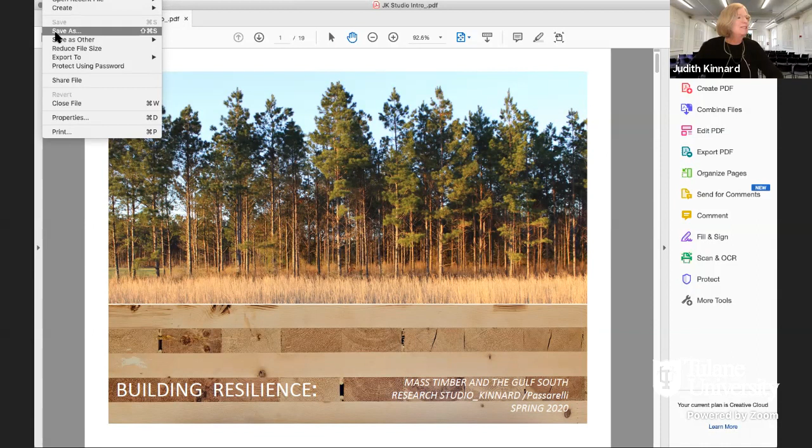So I thought I would— let's see. Hey, every time— oh yeah, sorry, I had joined the afternoon meeting by mistake, they're actually different numbers or whatever, sorry. That's Deborah, welcome. Hi. That is, of course, my fault. No, it's all right. I thought that we had to do separate numbers, but in any event. It doesn't matter, I figured it out. Well, sadly, I think I've created confusion for the students, for the faculty, for the entire world, but that's the world we live in.

So Deborah is a professor at Pratt Institute and a principal at Gans & Company Architects in Brooklyn. Deborah has a long relationship to these themes, not so much mass timber, but certainly housing and disaster relief housing and modular housing. She is also someone who has been a good friend of the School of Architecture and of the City of New Orleans, having done a lot of work in the post-Katrina environment in that setting, and has joined us in reviews a number of times.

So Deborah, we're delighted to have you. I'm delighted to be here. I'm looking forward to learning a lot.

Okay, every time I try to do full screen, something's wrong. Can people see my screen adequately? You went black. You might have to share again. Try to share the screen and not the app. There we are. You're back, but apparently I can't go full screen. Should I bother to reshare, team? Yes. I always do it wrong. Zoom is very finicky. All right, stop share.

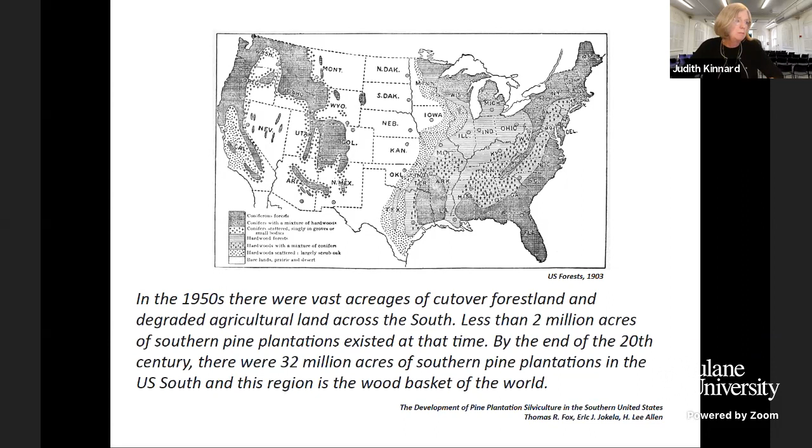So I wanted to give you the arc of the semester. The students initiated some research on forestry, southern pine timber, and some economic themes, as well as some prototypes associated with timber and mass timber, so that we could understand more about it.

We also looked at some economic issues, and I think this is particularly relevant now because in the post-COVID world, one of the things we've discovered is that the economics of forestry in this region, but probably broadly, is highly dependent on economic forces.

During the recession of 2008 to whenever, stumpage prices at sawmills went down, of course, because less building was occurring. Given the long cycle of growth for these forests, the lack of stability in this industry is a serious concern.

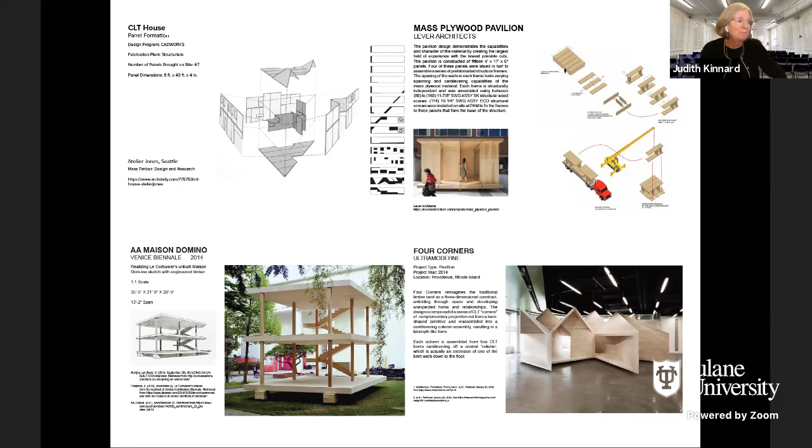But how could we resist it? So the first exercise that we did was, I think for all of us, a kind of learning experience about how this material works relative to the materials and structural systems that we understand, both in terms of concrete and wood and steel.

We took some interesting contemporary and maybe a few not-so-contemporary houses and went through a process where people first documented and tried to understand the structure as it exists, then translated it as directly as possible into mass timber. In a final phase, we gave them license to transform it relative to criteria they identified, either optimization criteria or criteria that were more fluid than that.

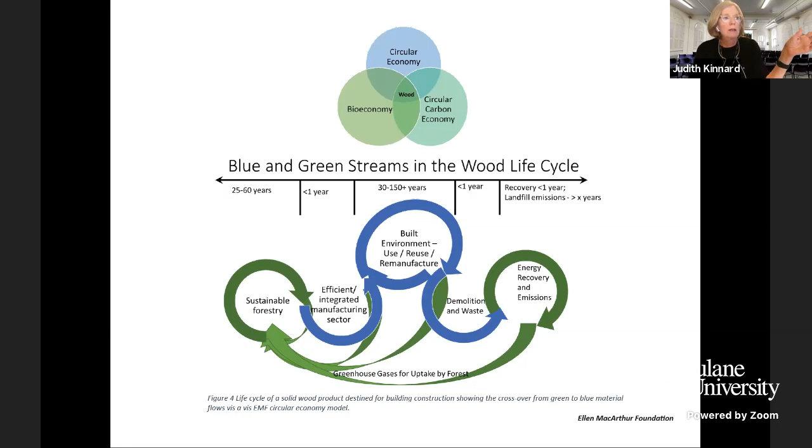We're aware that historically that's been a tradition in New Orleans. New Orleans is a wood city, and our interests extend beyond New Orleans, but of course we're in New Orleans, so we had that often in the back of our minds. Much of that wood was taken from those historic pine plantations, the longleaf pine stands that had been in the region.

A number of our houses were built from wood from flatboats coming down the Ohio River carrying goods. These were built by farmers out of 2x12 oak taken from the Ohio Valley, then dismantled and sold for lumber. Many of the shotgun houses in New Orleans are constructed from this material that started off in a different way, an early example, sadly uninsulated and not very sustainable, of solid wood construction in these barge-board houses made of 2x12s arranged vertically.

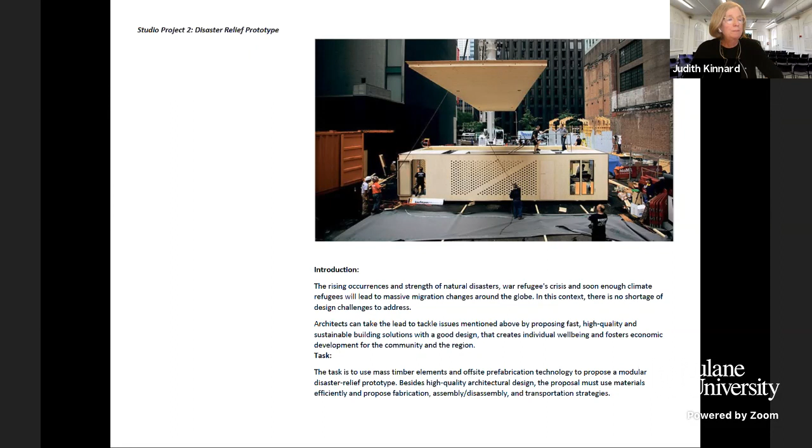The idea here was that we explored how timber could be used in modular construction. We looked at volumetric units, we looked at flat-pack systems, and then gave students some precedents which they analyzed, then asked them to make a proposal relative to a scenario that they could design, one that would be deployable rather quickly and then eventually find a second use.

We asked students to be as quantifiable as possible in this equation. We did go through some cost estimating spreadsheets, but I suspect you won't see much of that. You will see some carbon calculations, but...

This idea of building disaster relief structures out of wood probably does not make economic sense unless there's government support. Although the price of CLT is coming down with the addition of these new factories, and it's certainly a material well suited towards factory production in a serial kind of way.

So most of the students have volumetric modules, though there are some that operate somewhat differently, and you'll see that. We did go through these calculations, and depending on the scale of the unit, they might have 208 cubic meters of wood and certain carbon sequestration associated with that. A smaller unit will of course have less.

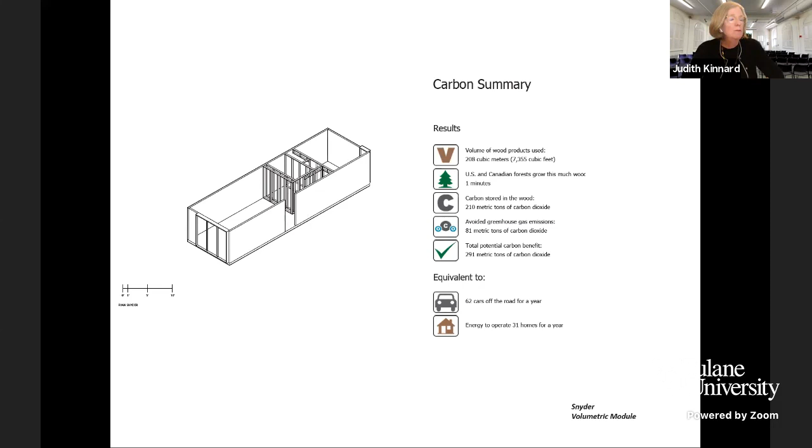In the end, when you think about CLT, it upends the equation that Fuller proposed in the 20th century, which was that lightness was better, that materials like aluminum and steel were going to create a lighter house and therefore have maximum advantage relative to themes of energy. This proposal inverts that equation, proposing structures that emphasize mass, sequestration of carbon, and the many aspects of timber, both psychological and technical, as an advantage worth considering.

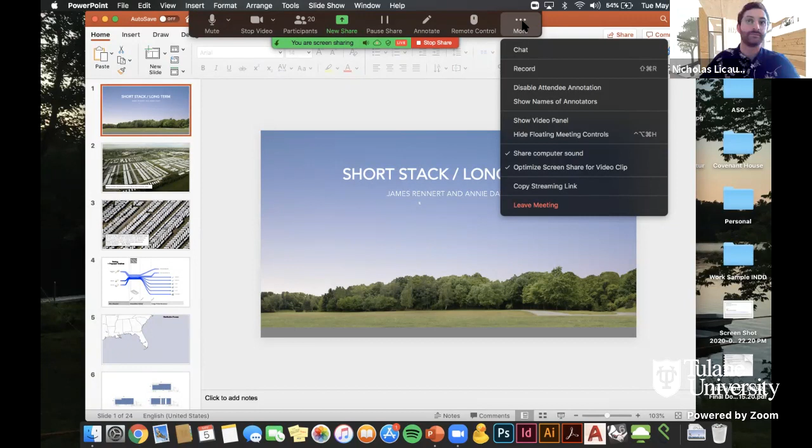Hi, sorry, I'm sharing my screen so I can't see anything but my screen right now. I think it'd be better if you click view options at the top and check show video, under more. Yeah, show video panel. Oh I see, thank you. No problem. All right, how's this working? We're good. You have to hide it because it's going to cover up your presentation, like we're going to see us over the video. But do you want that? We can change the grid. Oh I see, no we can't. No Annie, the video you're seeing is stuck on the screen. Yeah, got it. Click the tiny box so you can make it just one. Yeah, there we go, this is fine. Okay great. It wouldn't be a Zoom presentation if it didn't take 5 minutes to troubleshoot.

All right, I think that was a good conversation on the use of time to get us started. Annie, if you want to go to the next slide. Yes.

Judith just showed this image at the end of her presentation, but the thing that stood out to us most in proposing a better alternative for CLT as a long-term disaster relief solution is that you really have to think about the long term. These trailers were meant to be deployed for 18 to 36 months, and in the case of Katrina, they were here for over 45 months, just sitting here, slowly being sold off or disposed of as waste.

FEMA's explanation for this is basically that the units just aren't worth keeping because they're so cheaply made that they're only meant to be used for a few months. If people want to buy them for pennies on the dollar, they do that, or they just dispose of them.

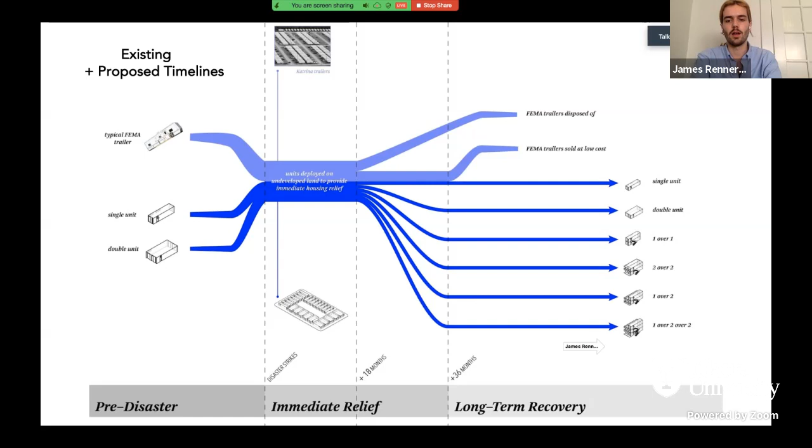So our project really takes two phases: the first being a way of providing immediate relief to as many people as possible, and the second being a way to create a long-term sustainable housing supply in the city.

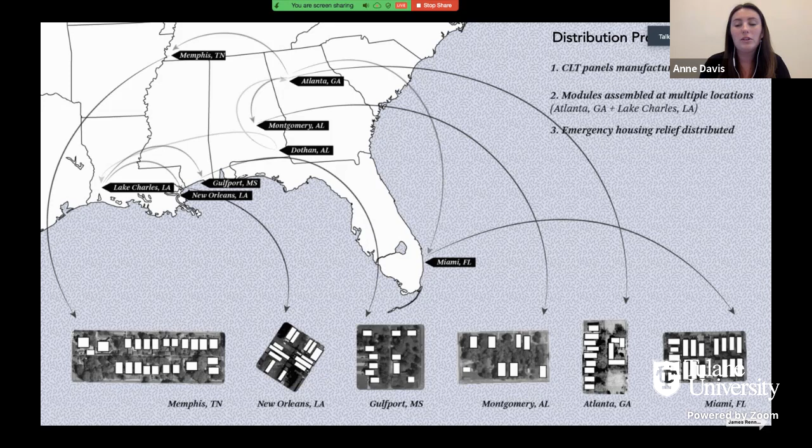There's a single unit and a double unit, which we'll get into more later, but they're both deployed by truck. These units were designed so they could fit on a truck bed and take up basically the whole space of it. The single unit takes up one truck, and the double unit is basically two single units put together, so that's two trucks per double unit.

It's also worth noting, since we're the first presenters, there's not much to compare it to, but I believe the units we developed are the largest, if not one of the largest, in the class. I think because we intended these for long-term habitation, we had a higher standard for amount of space.

The idea here is for phase 1 initial deployment, where you're deploying a lot of individual units on a low scale, as quickly as possible. We explored a few different options: one emulates a fairly typical city block; the second divides this into multiple blocks, which most closely resembles the FEMA strategy; and the third keeps dividing these blocks down as small as possible to create a really tightly knit urban grid in this first phase of deployment.

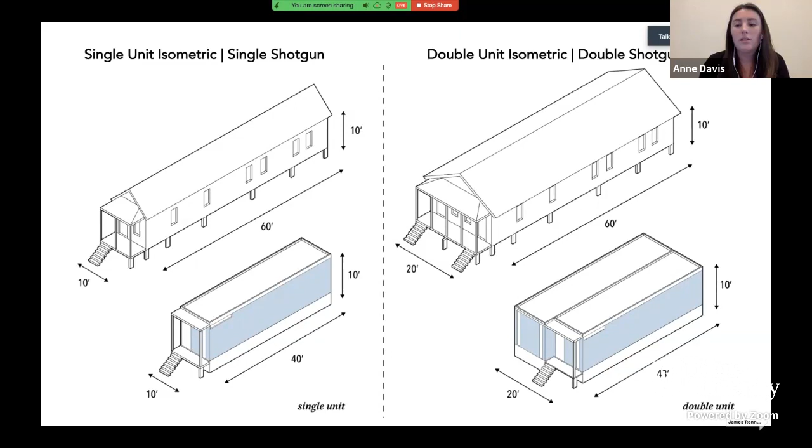These are our basic materials, not every single one, but when doing this material study earlier on, we thought it was interesting to compare how the square footage changed from single to double. From this we did a cost analysis as well.

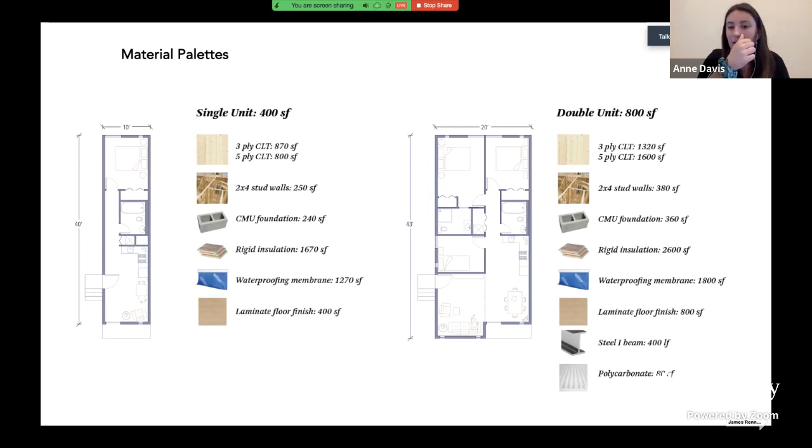Another thing we learned, which you'll see in coming projects, is that the pieces of CLT cut out of the panels don't have a great use. It's a wasteful deployment of CLT if you have a lot of punch windows in a blank, because you end up with unusable wood that's already been harvested. So we dealt with this by using the natural structural integrity of the CLT to our advantage, cutting most of our windows as floor-to-ceiling slits to eliminate this problem.

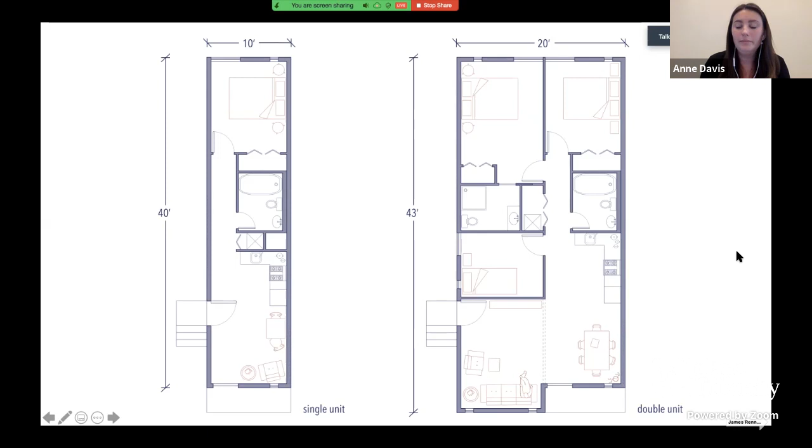This is a detail of the plan. This wall here is a polycarbonate wall, slightly translucent, in order to easily take it down. It doesn't go all the way up to the ceiling, so this bedroom can easily be changed into whatever suits the owner's needs.

We have a few sectional perspectives meant to show the relationship between the construction of the building, which you can see in the section cut, and the interior space as well.

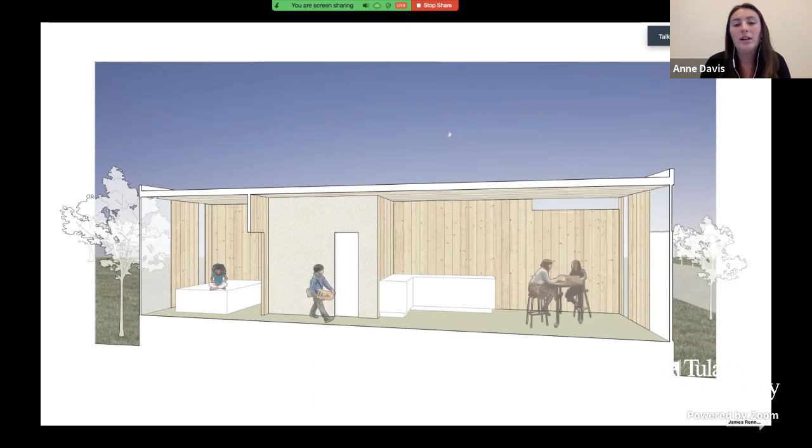And we have a few more section perspectives, these a little more rendered. You can see the CLT texture, which is one of the biggest advantages of this material - the interior doesn't need a finish to have a really beautiful space.

And then I think we're going to wrap up by talking a little bit more about what these look like when they're aggregated. So the idea really being that you can combine these in multiple ways. For the sake of clarity, I think we mostly showed it as if you put a single unit on top of two double units, which I think is a fairly typical scale that could be integrated into a lot of the cities we talked about.

But Annie, if you can toggle forward. Mm-hmm.

The materiality of these was something that we dealt with for a while, and what we ended up proposing is to keep them almost pretty raw in the initial deployment. So this top left study, that's Henry Blueskin, or really any long-term water barrier, and that would be for the initial deployment — they would be almost like these naked units. And then when they're aggregated, you really have an opportunity to put any finished material on.

So we looked a lot at Hardie board. I think it's contextual here, but you could do shingles or aluminum panels or whatever is most fitting to the context. Yeah, we wanted the aggregation cladding to be as easily applied as possible without having to take off cladding from the first phase.

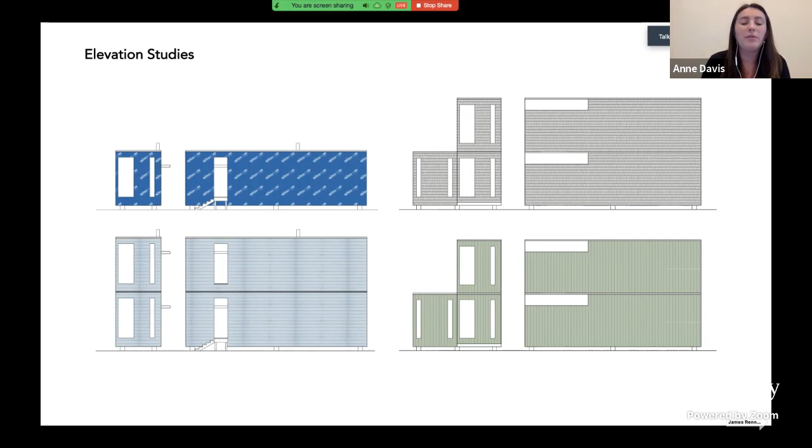So as James said, that turned out as basically having the cladding for the first phase be underneath the cladding for the second phase.

Great. A rather grand New Orleans environment. Yes, maybe not typical, but... the whole city's exactly like that.

Okay. So should I leave it on this slide, or would you like me to go somewhere specific? Well, let's leave it on that image unless one of our guests asks you to retrieve something different. Yeah.

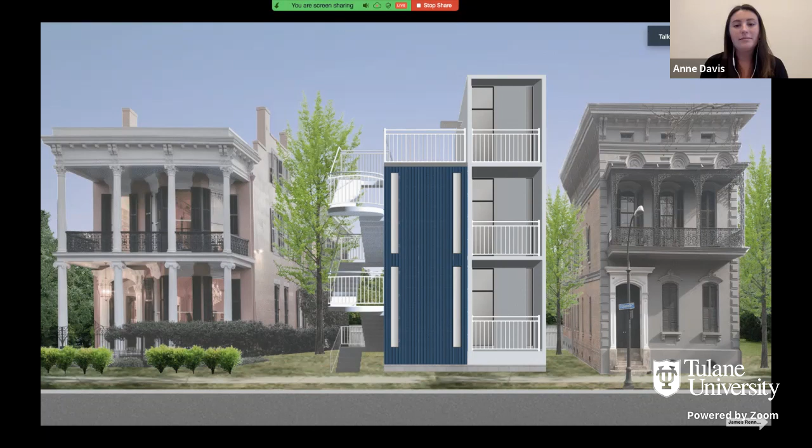Can I just have a couple of questions. This is Tim.

So given the lateral and vertical loads of CLT, what's the minimum foundation support layout? Could you have a series of sonotube poured columns coming out of the ground spaced at some distance? I'm interested in what the minimum foundation solution would be, because you tend to quickly wrap it in poche. One proposal was a series of CMU walls parallel to the length of the modules. The other is this idea of point foundations. I'm just curious what the structure allows — how you could solve that. I'm trying to imagine what the minimal foundation solution would be.

So for the first phase, we're imagining a CMU wall. And then for this aggregated phase, we imagine screw piles. So in New Orleans, obviously you're going to need a lot more foundation support than in other cities, but yes, for the aggregation, it would be a much more permanent screw pile condition. And then I think the foundation is just wrapped to enclose the actual structural solution. Yes.

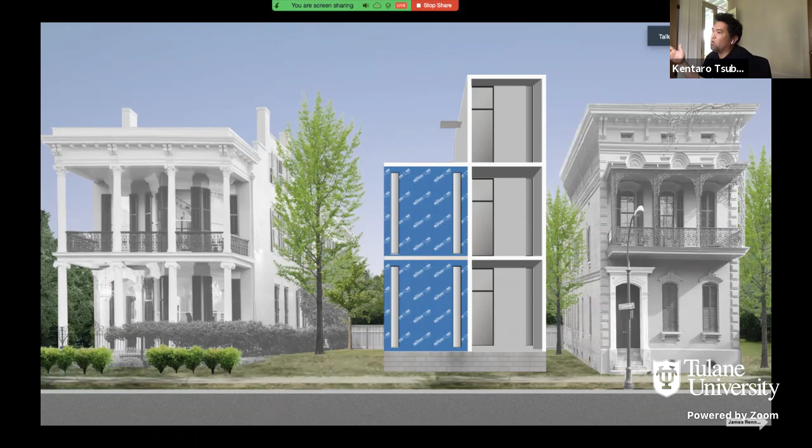A little technical follow-up: you would actually get two walls at the center, right? Not two modules. And that would also help, and maybe you could then do it with a T or a flange on top of the wall to mend the roofs together.

Do you just put the roofing membrane right on top of the CLT, or is there another substrate? Is there insulation at some point? There's rigid insulation on the outside of the CLT, and then the weather barrier.

But to pick up on Deborah's question - wouldn't you have to ship them in as two boxes, fully structurally self-sufficient elements, so that you would get a doubling of the wall in the middle? Which would help.

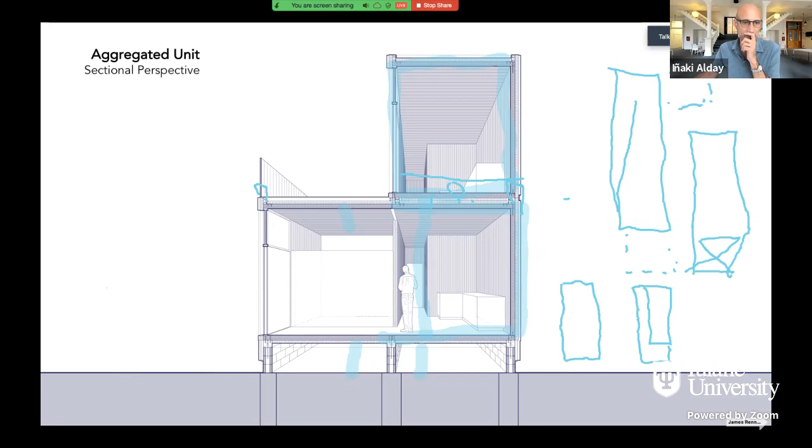But really interesting and thorough. And let me clean all this mess.

You'll see some variations that get at some of that. The idea that they become—first, thanks for pulling us back, because the whole premise that these become permanent housing, that there's no such thing in a certain sense as temporary, I think is a beautiful idea, and we should say that to begin with since we all just jumped right in. But I love this notion of the gap, the spatial gap, the courtyard, the flexible thing in between, because with CLT it's a very solid, gapless, airless kind of construction. Especially in terms of infrastructure, we don't really understand the infrastructural systems and whether they differ between temporary and permanent. The idea of the gap at the scale of the courtyard is wonderful in that regard, but also the gap at the level of the chase.

I thought you were going somewhere when you mentioned stud wall construction within the CLT, because it's really hard to run services in CLT—you have to route out the wall. Where do you put your electrical conduit? How do you get your plumbing through? So the idea of creating a gap by having an enclosure within an enclosure, where the bathroom is somehow separate from the structural shell—it's not as spatially poetic as a gap that becomes a courtyard or somewhere to live, but it's an equally important notion of gap and air within these houses. I think you could push that further—how does that bathroom or kitchen or air shaft chimney effect nest within this thing that is so tight and solid and resists penetration the way CLT does? It could be really wonderful.

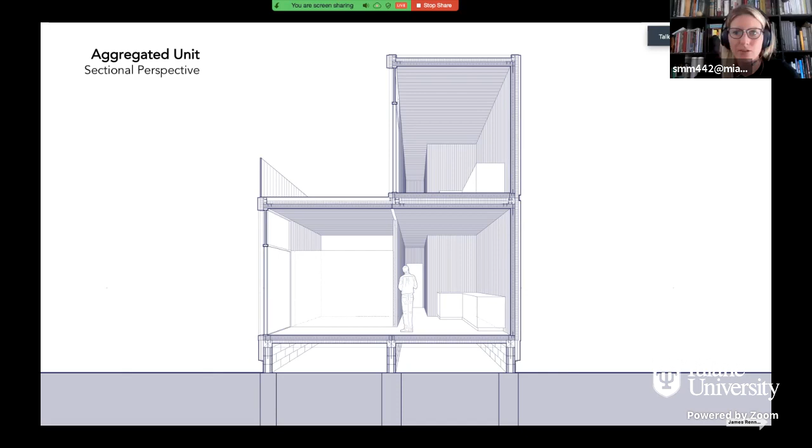Great. I just wanted to say, I think one thing you did take advantage of—I don't know exactly what your ceiling heights are here, but they look to be more, like maybe 10 feet high or taller. And that's one advantage when you're designing and using these panels, is that we can use those taller ceilings. I noticed you guys place windows up at the ceiling. Perhaps they're operable—let's assume that they are. So it seems like you're trying to understand how to passively inhabit these spaces and really deploy some of the material and economic efficiencies within the panel, because it's no more expensive to make an 8-foot box than a 10-foot box.

And that also, I like seeing it in this context, which we all laughed about, but it allows this to be more contextual to those high ceilings that exist for a reason in your climate, in your context. So I do applaud you for that, thinking through it that way.

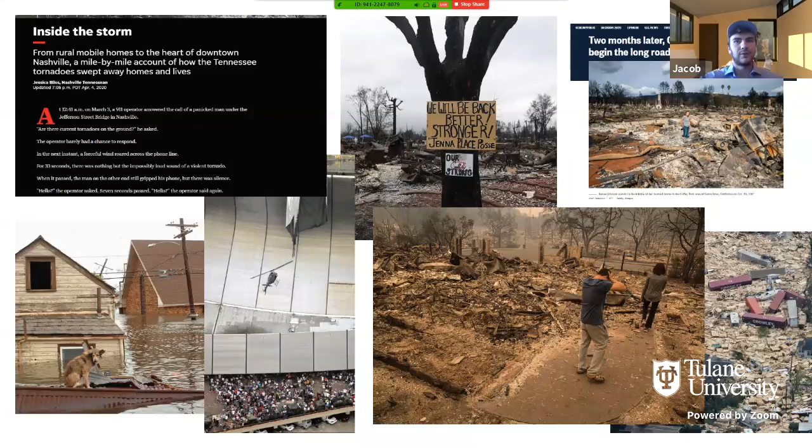To start my research, I looked at the National Disaster Housing Strategy by FEMA. They developed this plan after Hurricane Katrina, because they realized their current plan was inadequate at a federal scale.

The national goals they outline are: support individuals, households, and communities in returning to self-sufficiency as quickly as possible; affirm and fulfill fundamental disaster housing responsibilities and roles; increase collective understanding and ability to meet the needs of disaster victims and affected communities; build capabilities to provide a broad range of flexible housing options including sheltering, interim housing, and permanent housing; build and integrate disaster housing and assistance with related community support services and long-term recovery efforts; and improve disaster housing planning to better recover from disasters, including catastrophic events.

The scenario I was looking at for this CLT proposal was interim housing after a catastrophic event. FEMA defines interim housing as the period from the day after the disaster to approximately 18 months after. One thing they really emphasized was the need for a rapid response to a disaster.

That's why I was looking at doing these prefabricated panels that could be shipped, because I was worried that, as discussed with oversized loads, after a disaster you don't want to wait for a bunch of oversized modular units to arrive. That takes a lot longer, whereas you could rapidly ship a shipping container that fits into more modes of the transportation network.

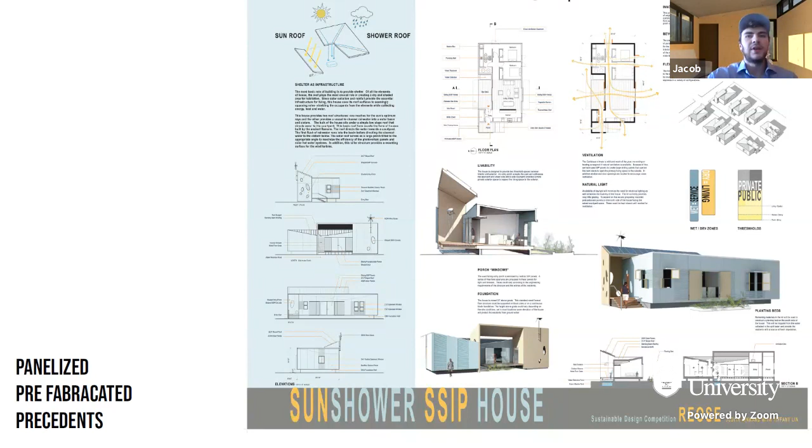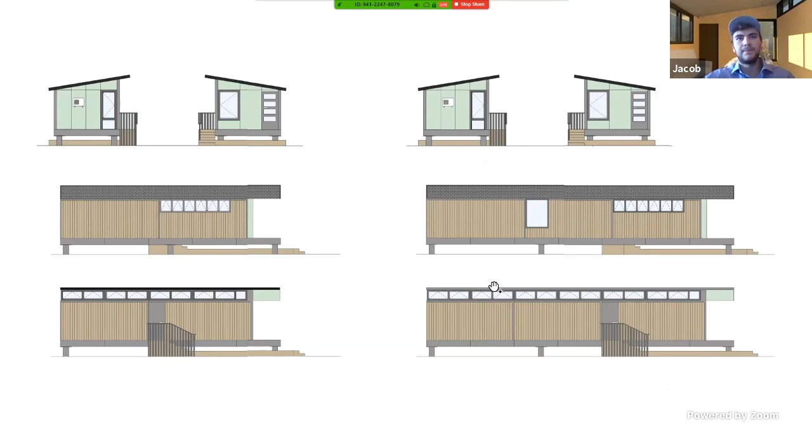Now let me bring these videos over. This is an animated assembly I made of the house, and you can see what I was talking about with those different panels. This regular construction and repeated panel sizes speeds up fabrication time so it can be a rapid, large-scale deployment.

I'll play that again - and that was for the two-bedroom. This is for the one-bedroom.

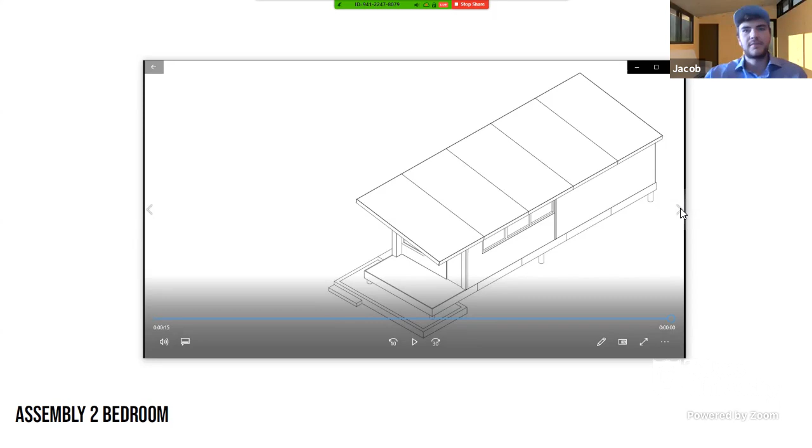Is the roof CLT too? Yeah, so the roof would be CLT panels. I was thinking of doing solar shingles through a partnership with Tesla to offset the energy costs and make them not so demanding on infrastructure - I have a slide talking more about that later. It would be CLT panels with solar shingles on top, and there would also be a membrane.

So this is these going into the shipping containers - this is for the one-bedroom, I believe. Let me start it again. This would fit into a 40-foot high cube container, where the interior dimensions are 39 feet 5 inches by a height of 8 feet 10 inches, and a width of 7 feet 8 inches.

You can see the different components - the idea is that these would all be bolted together. I propose using an XRAD system, but that's one area I'd like to look more into, the engineering aspects of fitting these together and how you could really engineer this design into a working proposal.

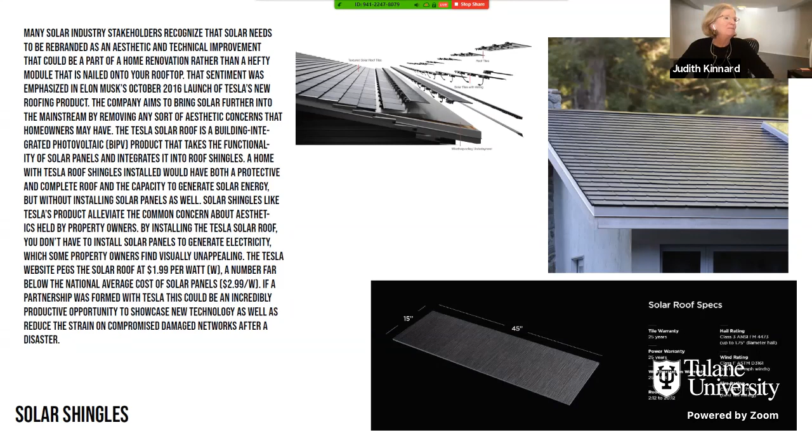This is the solar shingles here that I was talking about with Tesla. And I get that these are all very expensive products.

So the idea I was thinking to offset these expenses is that, according to the FEMA disaster strategy, they really suggest using public-private partnerships and creating a plan ahead of time. So I was proposing that possibly you could work with these companies ahead of time to do some kind of charity or tax incentive to get these products and technology into the public realm more, letting consumers see how easy it is to have these solar shingles that would offset your energy costs, as well as Tesla testing them out. I think helping disaster victims is a worthy cause for donating some technology.

So these would be applied, there'd be a membrane on top of the CLT with the solar shingles attached, and they would be shipped in the shipping containers as well with the houses. That's kind of where this idea of storage, deployment, and then shelter comes in as an idea of reuse. In theory, these panels would be able to be unbolted and put back into the shipping container and reused again.

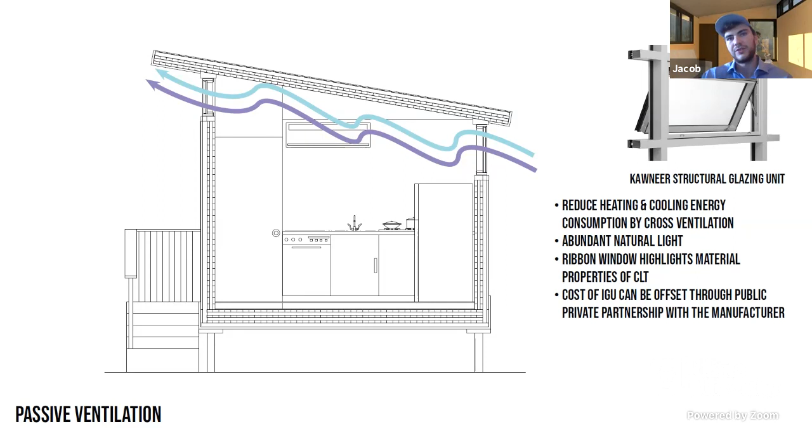Great, thanks Jacob. Yep, that's it at the end.

Derek speaking here. I'm just wondering about the approach, obviously, a panelized system has significant benefits, but I'm wondering about the necessity to deploy labor to assemble it as distinct from something which comes essentially prefabricated. If we look at the previous one, which is essentially modular, you put in your mini piles, develop something to deal with the foundations and structure, and pop it on top, and essentially you're 90% of the way there.

With no necessity for local trades, local organization, logistics, etc. So clearly, when you bring the panelized version, that takes some time to deploy, and you need skilled labor in order to do that. So I'm just wondering, was there a conversation around that balance between the two? This is not an architectural question, but simply a logistical one.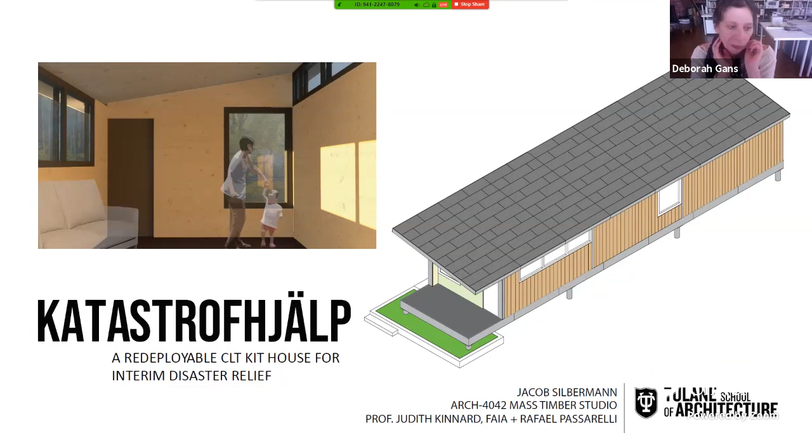Hey Jacob, this is Deborah. Just wanted to say, I appreciate the questions that you asked at the beginning of your presentation.

And I think the whole premise of the studio is set up to challenge how we accept, you know, what does it mean for disaster relief or just housing communities, right? And the first project did the same. And I think one of the advantages that both of you have touched on in using CLT is using a wood, a natural material, a sustainable material, to create a healthy living environment right away versus accepting these trailers that, let alone the waste, but I would argue they're not healthy living environments.

But I guess I would ask you to continue to challenge the notion of what does it mean, especially since yours is meant to be temporary, and you talked about that temporary, and you do accept that sometimes they define temporary from 45 days, but it goes up to 45 months or years, whatever. So how do you create that healthy living environment, but accepting that it's a temporary living? And maybe we can begin to peel away some of the things that you're providing in your proposal here, like is there a reduction of just materials and maybe even programmatic elements that we can live without under this temporary notion? And I'm not asking to sacrifice quality of life, right.

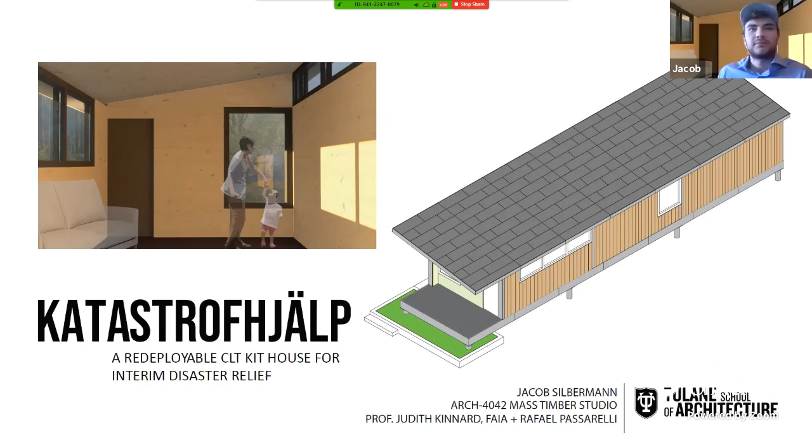So I wonder if in your proposal, maybe if we can just see the slide in the back - this animation again? Can you see, like, which one? No, just the slide in the back without the animation. Oh sorry. So I wonder if - I'm going to try to see if I can do a better job with the iPad in drawing.

Yes, so I wonder if you can have like one kind of window, no, and one kind of whatever, beyond the structural problems that we might have seen here. But in a way, there are a lot of different elements that you have to be looking for them inside the container to put it, no? So I just wonder if one way of continuing the thinking in this, not only in this project but in this philosophy of design, is how much can you reduce the number of elements that can be used in very different situations, the same element, to solve the different needs that you have.

And the simplicity of the CLT panels too - if those windows are all vertical windows that are full height, then the panels are simpler, and there's a whole economy of means overlaid onto this project that I agree with Inaki about. I think that would also help sort out questions about the order of assembly, and using the ability of CLT panels to act as the columns and supports themselves would be maybe a different way to even tackle the whole issue of fenestration.

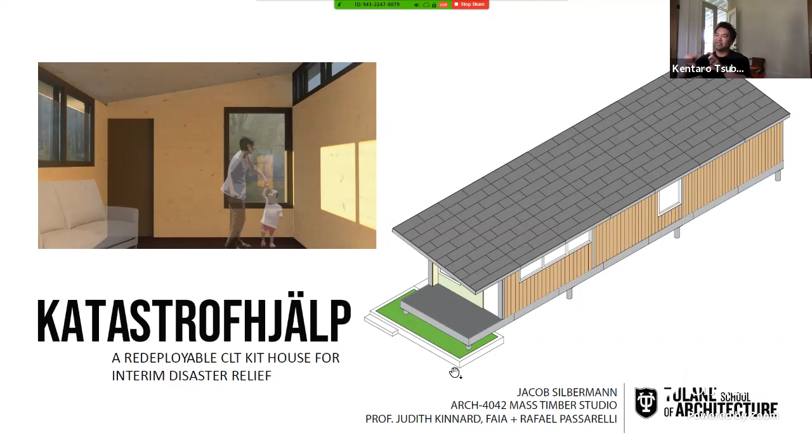Well, so the CLT - you're going to be spanning the CLT panel as a floor, but what really has structural capacity here is the exterior CLT panel vertically, because the deeper the section, the more capacity to span. So I've been wondering - the strategy should not be the floor supporting the wall. It's the other way around, where the wall spans between and the floors hang from those things, as opposed to the other way around. Because if the floor is actually supporting the wall, look at the wall, the section of the floor itself.

Well, that's a really good point, Kentaro. We did discover that this platform frame is the preferred method. And why is that? I think it's either ease of assembly, or the other approach would put a lot of strain on the bolting mechanism, the steel or whatever material the bolts are, and this is more of a gravity system.

I think it's because of the two-way nature of the CLT, the two-way load. But I could be misconstrued. You can do it the way you described, but I think you'd spend more on the connectors.

Yeah, just to jump in, the conventional way, especially in a factory, is that you lay the deck, the first layer of CLT, and use it to have your walls plumbed and aligned. So you don't have shear force in the screws like you would in balloon framing. It's more conventional for CLT to use platform construction. But in a small building like that, you could do it differently if it's more economic or efficient, though it would have to go through a different level of development.

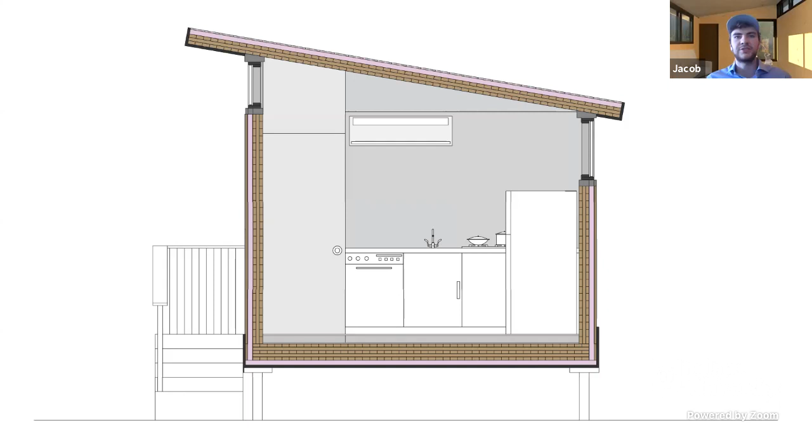So you're saying something more unusual, not so regular? No, I'm saying the opposite of Terragni and Eisenman. I'm saying more like Kahn. I couldn't be further from Peter Eisenman right now in my comment, but I appreciate that you brought him up.

Hey, can I say one final thing? I get that you're letting the 8 foot panel run horizontal and maximizing that dimension for the size of your box. I think, like Tim was saying, you're letting the packing of the box put you in a box. But even if you had another 8 foot panel cut into 2 foot or 4 foot pieces, and stacked the CLT so your ribbon window didn't have to be continuous. It's about allowing yourself to think about how you're cutting up that panel. So it's about questioning the process of packing everything in the box, but then saying, I really want this passive strategy, and going back through the iterative design cycle and feedback loop to eliminate this 8 foot constraint on the wall. How can I do that?

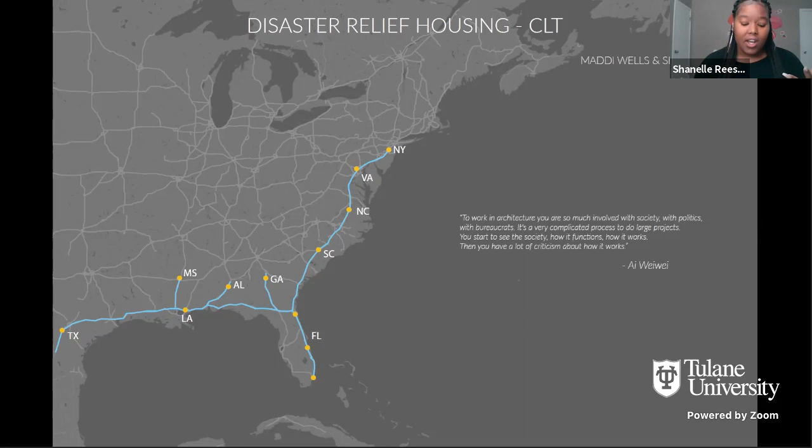So when taking on this project, me and Maddi were very concerned with the design needs for the people who were unfortunately left behind during certain disasters. Through our research, we found that people normally left behind during these disasters are people with housing or financial insecurities, people with disabilities, and some people who are just overly confident that they can survive a storm.

You can go to the next slide. So living in the South and along the coast, we are most prone to hurricanes and its disastrous storm surges. Living in either of these 10 states - New York, Virginia, North and South Carolina, Florida, Georgia, Alabama, Mississippi, Louisiana, and Texas - these are some of the top 10 states normally hit by serious and disastrous hurricanes. So some of the similarities we found between these cities was a coastal rail line that ran through all of them, called the CSX freight train.

It's extremely important that during disasters these resources get to places in need quickly, and we found that a very efficient way to do this is through train. Our module is going to start in Dothan, Alabama, and travel a journey through Tallahassee, Pensacola, and New Orleans. A typical freight train travels 14 miles per hour. Going from Dothan, it has to get to the coast, starting in Tallahassee, riding through all the coastal states, and it'll take roughly 11 hours, 12 minutes, and 51 seconds for our units to arrive on site.

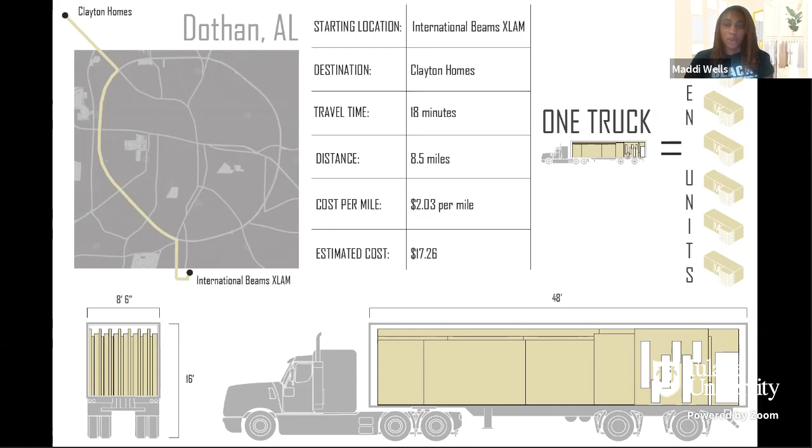Getting further into that breakdown, analyzing how you get from International Beams, where the CLT is fabricated and created, to a place such as Clayton Homes, where they make prefabricated mobile and modular homes - we analyzed how we'd get this from the fabrication factory to the prefabricator. Looking at how one truck can carry up to 7 units if it were just the panels, how much that would cost per mile, and how far that is within the city of Dothan. Then looking at how the transportation would work once fabricated into a module, and how much that would cost, exploring different opportunities for transportation.

But even after that, getting it to the train station, going through Dothan, Tallahassee, Pensacola to New Orleans, you see that with one train able to carry 200 or more shipping containers, you're able to get more units in one train ride, which may take 12 hours versus 5 hours of driving. But you get more through a train than through a truck - versus one unit, you get 200.

All right, so now we're going to get into explaining what our module is and the breakdown of this unit we created.

The module itself stemmed from this idea of stereotomic, and then adding this extruding tectonic element, which we call the pop out, and then having this transitional wall as far as the design.

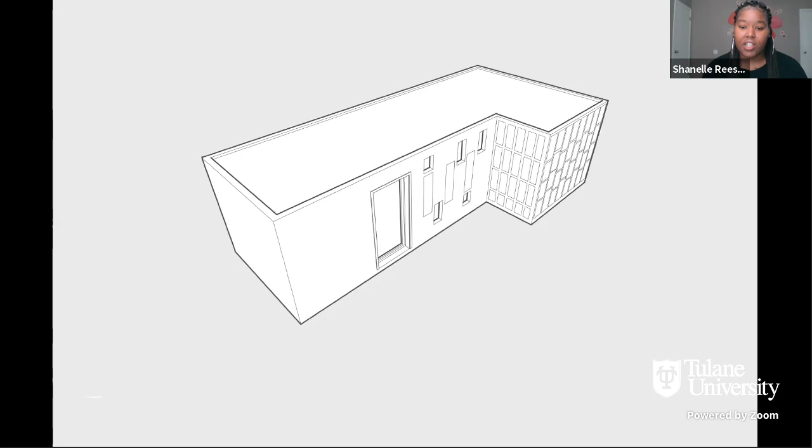Next we have a GIF showing the breakdown of the bathroom, the living space where the kitchen is, the bedroom, and then showing how that pop out is attached to the bedroom area.

Once we get into the floor plans, Maddie will explain how those walls can either be interchanged, or where the pop out can be placed.

To provide some more variety, we decided that the pop out should be able to be located either as an extension of the bedroom or an extension of the living room.

This led us to develop a variety of modules, such as the L, where you have the pop out as part of the bedroom, and the T, where the pop out is part of the living room.

The N, which is two L's mirrored from each other, is for intergenerational families - maybe your parents and also a college kid who want to have that shared space within the courtyard, but also need their own separate space and are able to take care of themselves.

We also developed the H, which is kind of two T's combined, which could also be for intergenerational families or a family with a small child.

The H also has a larger kitchen, as you can see here, to provide for a family with more than just one or two people.

As you can see, this is getting into sectional and elevational exploration of the space, so you have these subdivided areas of bathroom, kitchen, living, dining, and bedroom.

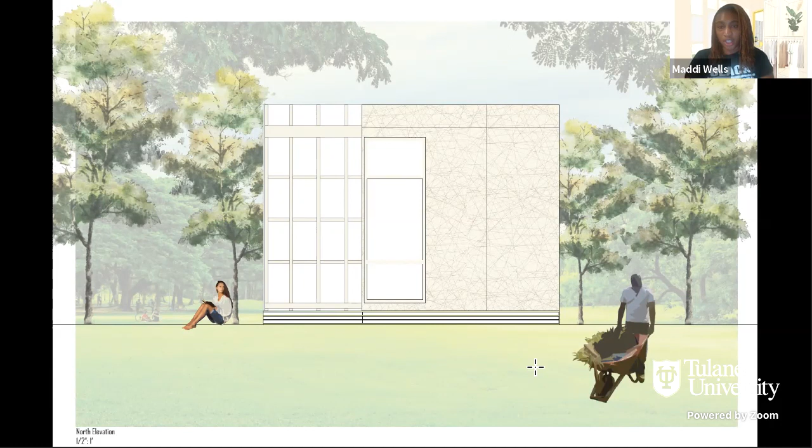You can see how the tectonic is fully expressed in its stud walls, using only a polycarbonate cladding to express and differentiate from the stereotomic and the tectonic.

All right, so deployment. Once our units get onto the CSX train line, then when it gets into New Orleans, it moves over to ownership by the New Orleans Public Belt. You can go to the next slide.

Once the New Orleans Public Belt has our units on their train line, the units are then stopped at our freight train terminal, which sits in front of our site.

We'll then have a crane come into the site to be able to unload each unit. It'll be assembled, and then the crane will place each unit in our particular arrangement on this site.

We picked the site a little bit closer to the river because in New Orleans, the ground right there is going to be a lot higher. So if we ran into any storm surges or anything like that, this area wouldn't flood as bad as if you put it on lower ground somewhere.

After these units are no longer needed for the disaster in New Orleans, they can be backloaded onto the freight train and sent to other cities in need. Or if New Orleans would like, it can also be stored in warehouses along the city for quicker access for future disasters.

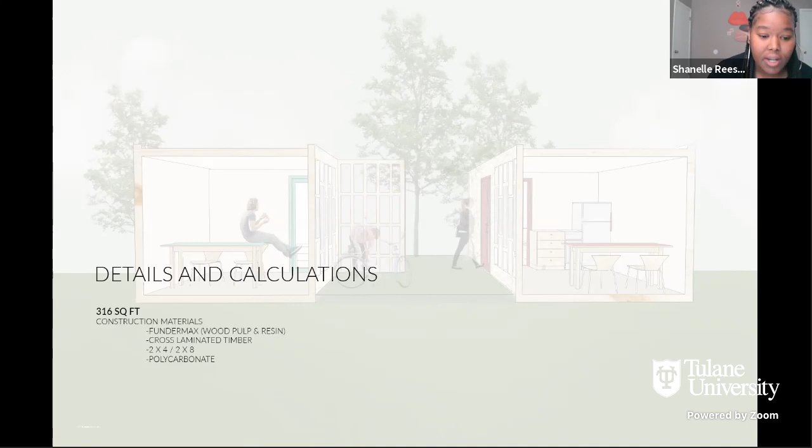The construction material consists of a Fundermax cladding system, which is made of wood pulp and resin, cross-laminated timber, 2x4s and 2x8s, and then polycarbonate for our windows.

This is just explaining the fabrication of the unit overall, showing the panels and the carbon calculations. As you can see, this particular unit is equivalent to 4 cars off the road for a year, and also energy to operate 2 homes for a year.

And as you can see, even here, the pop-out is still regarded as its own separate entity that gets added on later as a flat pack system.

This will go through the wall sections that we explored and the details that we researched. We have a parapet, and similar to what Kentaro was talking about earlier, the wall goes past the roof and supports the roof rather than the roof being packed on top of the wall. You can see the connection to the foundation.

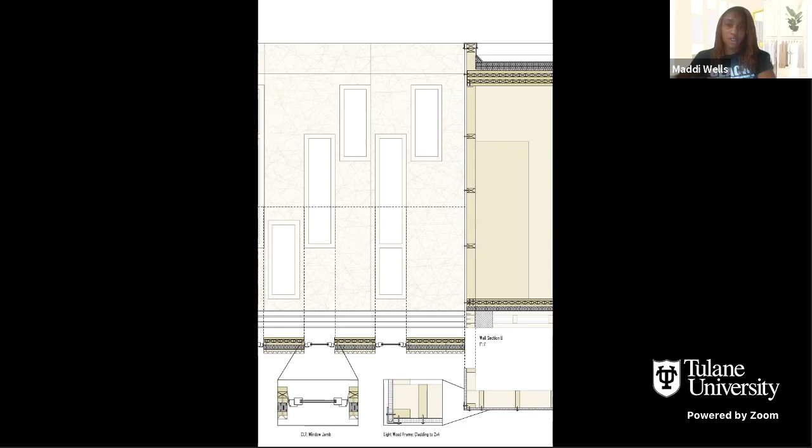This explores the transition wall where we have those windows and how that jamb works. Also looking at the pop-out wall fabrication and how the polycarbonate connects to the 2x4s. Then looking at the one window we have in the bedroom and how you connect the floor-to-ceiling window with a parapet was kind of difficult, but we managed to figure it out. Then we have some visualizations of what we imagine this environment would look like.

And that's our last image. Great, thanks.

So just a first question: the pop-out can either be deployed on the end of the module to make the L, or in the middle to make the T, but it's the same flat pack pieces. Is that the idea? Yes. Oh, that's cool, okay.

Can you go back to the slide where you show us your panels that you laid out? Thank you.

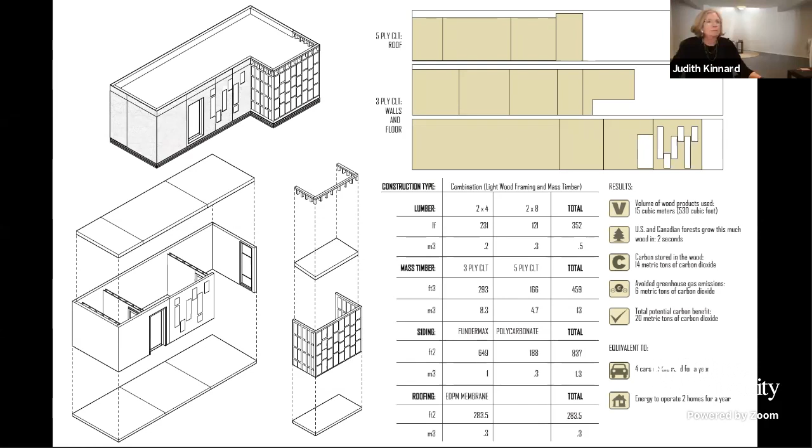I'm very interested that you guys chose the term stereotomic. I appreciate that you really approach this through an architectural lens and try to explore different architectural devices and deploy them with the same material method. But I find the idea of carving a space while working with a panelized system maybe too juxtaposed for me to understand. So maybe you can talk about how you landed on that term.

Yeah, so if I go back to that diagram, at first when we were discussing it, we weren't even thinking of the CLT and the 2x4s as two separate systems. But ultimately when we landed on having this pop-out that adds itself to the CLT, it occurred to us that you can do similar things with CLT by carving out windows, but as a panelized system it's really solid and durable and would preferably not have any cutouts in it, versus a stud wall where you can do what you want and make any sort of openings and windows. That's why we wanted to express that with the tectonic pop-out and show that yes, CLT still can do all the things you can do with a stud wall structurally, but for more flexibility, especially within openings and removal, it would be better to use 2x4s.

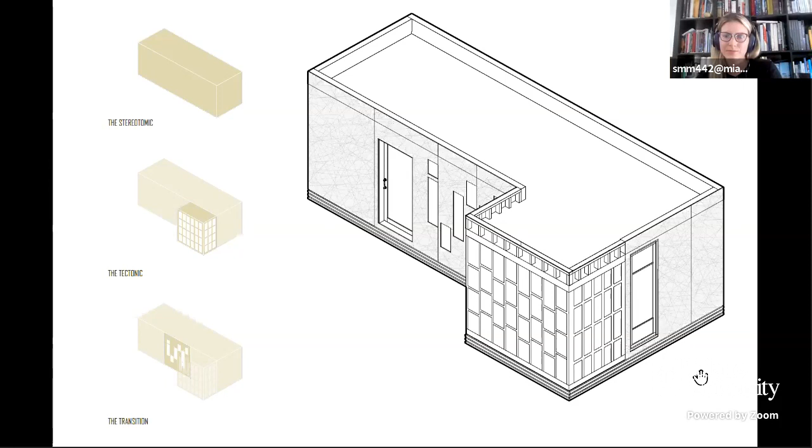I think that what's interesting in terms of your project is the ability with the addition to make some kind of spatial possibility between the pieces. And I really like that kind of conversation that you had.

But I suppose what I was thinking of was this is the first project in a certain sense where you get a sense that there is an idea in a way about what the architecture is, of what the spatial kind of feeling of it is.

I was reminded, and I'm very nervous about saying this in the company of Ms. Gans, but I went over to the bookshelf to dig out a few things. I suppose, Corb's prefabricated houses of 1940, or perhaps the Chilean one, Errázuriz, of 1930. Somehow they're very much about prefabricated things, but yet there's a heroic idea about the architecture of them.

And I suppose that's what one's kind of hoping that you will find here someplace. And maybe the aesthetic of the CLT as being closed or wall plane versus the opening, which is other, might be explored more.

In such a way, rather than where we get the different windows, for example, on the current illustration, where you have a door and then a series of uppy-downy windows and then a series of other windows, etc. It seems to me that it might be more minimalist in a certain sense, or more direct in terms of what is wall and what is opening.

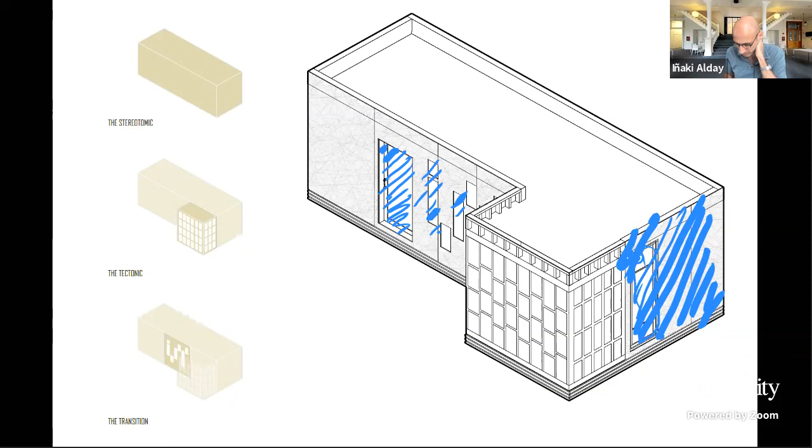If you really need to enter through this door, or if it can be—of course you cannot make this piece absolutely solid—but maybe you can enter, you can get the light, and you can use this added piece as the joker that will solve everything that is not pure CLT mass, no?

And it's actually a very clear architectural strategy, no? Moneo, the Miro foundation of Moneo, that is this thing of the block and the star, and there's a number of other precedents at many scales of architecture that use this technique, no?

But this, having this as this completely basically industrial, closed, simple, and then you have the sophisticated element that is added in this position or added in this other position or wherever, no? Wherever is needed. And then that is what brings you the light. You enter through it, you solve the interface. And it also has this amazing quality of creating the outdoor space for the house and for the neighbors in between the houses. I think it's really promising.

I would just love to see like a kind of more radical exploration. Iñaki, my caveat would be that you could either put it here as shown in this illustration, or you could put it in the middle, because that would be also a kind of infill wall that you could plug in this thing in two places based on the plans that we saw, which I thought were very smart.

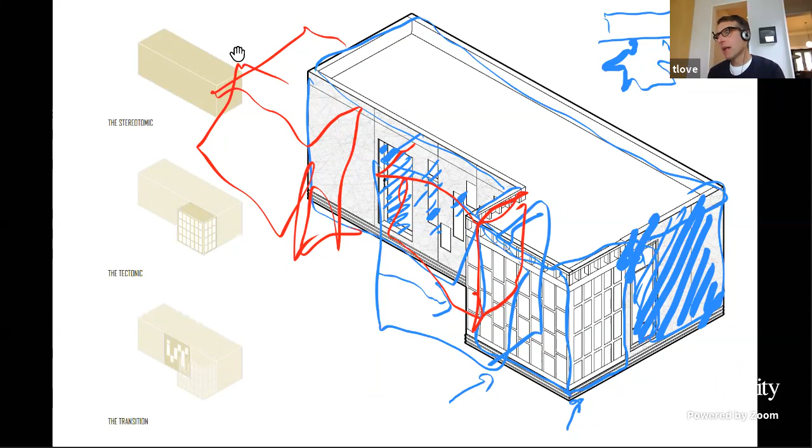But I think I agree with Inaki's kind of analysis that the clear differentiation and getting as much mileage out of the stud piece as possible is a nice idea.

So I was kind of thinking about self-reflecting and self-criticizing. I understand the previous comments that I made, and I realized two things. One is, Judy said it at the very beginning, that the efficiency here is not necessarily about the lightness, structural lightness, or the efficiency of the material use. It's about carbon sequestration. That's number one.

So, trying to skim on certain depths of materials is not necessarily an issue. And then, so from that logic, I think perhaps the parapet may be a wrong way to go, because if you do try to hang something that way, I haven't really looked at the detail carefully, but you're probably going to need to introduce some other metal hardware or something that embodies different types of energy and implications. So, I don't think you can do this without doing that.

I don't really understand why it has to be a parapet condition. The challenge is, if you want to prioritize from a design perspective the vertical wall, then how do you detail that edge with the fact that you're putting a CLT roof on top of it, bearing it on the edge? That will be an interesting design exercise to take a look at.

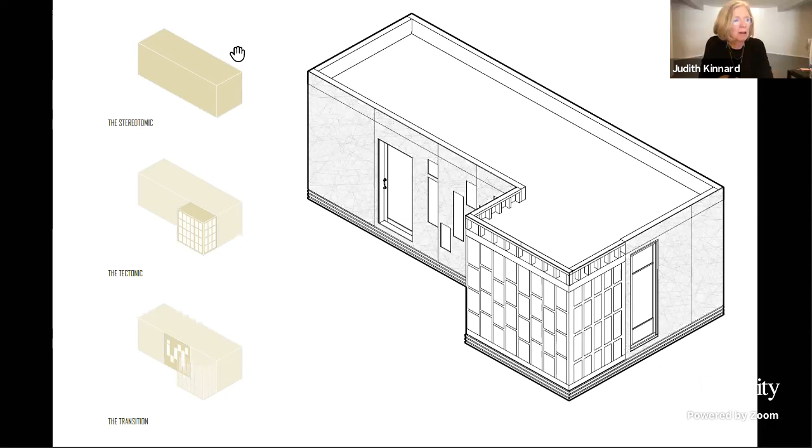That is a big question, which we're not going to probably solve at this point. Well, we have one more project for the morning. Should we make a transition?

Judy, before you go there, I think what was not celebrated, I suppose, in this project was the question of transport modes and the use of rail, which I think seems a very cogent kind of thing.

I mean, obviously there's the issue of transport modes and double modes and changing from one to other, and once you have to unload it, then you've got a difficulty. So clearly, if you make your site right beside the railway, that works. But if your site is 10 miles away from the railway, the issue then is that you have to offload it onto a truck, and the truck has to go to the site, etc. So you've got a lot of double and triple handling which begins to take place there. But I think the idea that you could do this by train seems to me to be something kind of quite interesting, and the analysis is done, but also I think conceptually, I think it's a useful thing to do.

Right. Yeah, I like that aspect too.

Ditto. And I also like the site plan of the group of them and its variety too, and the way that you handled the parking as part of the site plan. It was also well done.

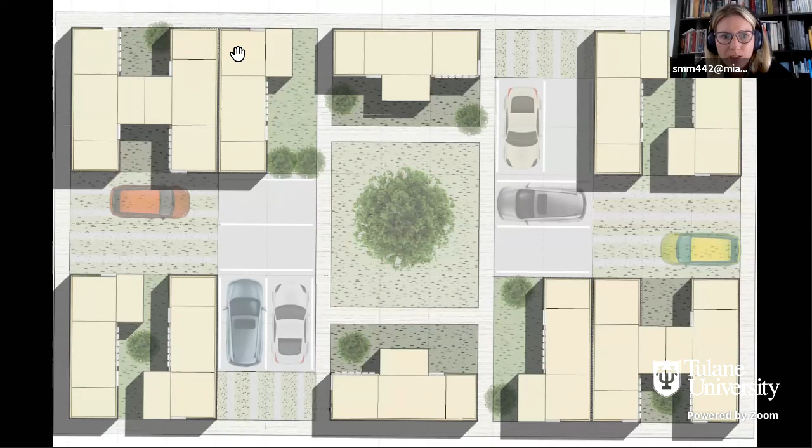On the logistics question, I wanted to ask that because that's something we're thinking a lot about, and I think it's one of the challenges in the US in terms of making this a commodity. It's cheaper right now for the East Coast to get their products from Europe coming across on the water. And so you guys looked into trains, which I appreciate. Did you ever think about water transportation?

No, we actually didn't. The first iteration was through semi-truck trailers. Then when we started looking into where our site was located, we realized that the New Orleans public belt sits directly across from our site. So we started to focus more on that and try to get enough research to push that point of why this mode of transportation is better.

Right, I think that's great. And we hear that, or just what we've heard from SmartLam specifically in Dothan, is that you can truck it anywhere - of course it can happen - but it's just so much more expensive than the cost of some of these other modes of transportation. But then when you're trying to work on a timeline, the other modes of transportation aren't as dependable or reliable. So I think the question of logistics is one that even as architects, it's valid for us to dig into and think about, to try to understand how we might use multimodal transportation. So thank you, I appreciate that.

All right, so the last scheme is Hannah and Nick.

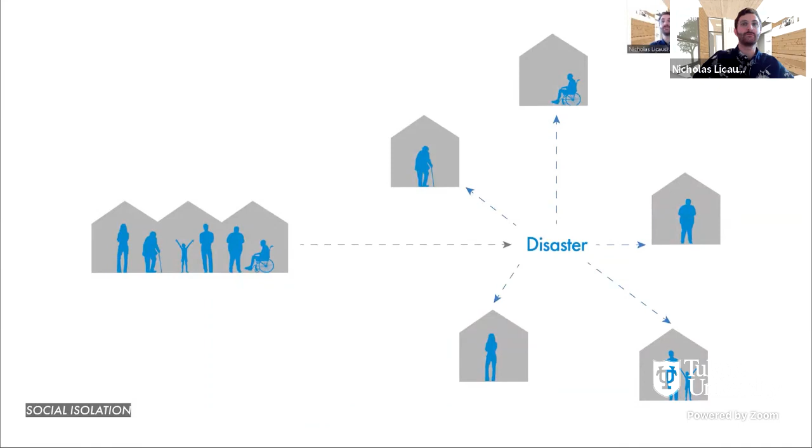Throughout our research, we have discovered a few key challenges to housing displaced people after a disaster. Social connections, which are necessary in disaster situations where everyone is dependent on one another, wither as everyone is dispersed far from their communities. Because of this, we propose that disaster relief housing become co-housing, which is a form of housing relying on building social capital. This form of housing decreases personal interior space in favor of larger shared spaces.

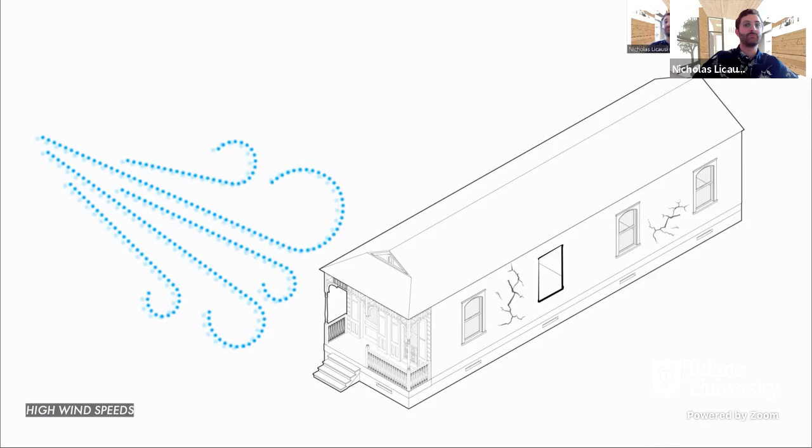We've also noticed three key architectural challenges with typical disaster relief housing in the Gulf South. The first is that residences are often placed near ground level, making them prone to flooding during tropical storms and hurricanes. In wood-framed homes, typical in the Gulf South, flooding often brings mold, which can be harmful to inhabitants. In addition to flooding, natural disasters often include high wind speeds, which can do considerable damage to lightweight construction methods.

In order to combat the intensification of natural disasters in the Gulf South, we should seek to reduce our use of gas-powered vehicles. There is estimated to be as many as 2 billion parking spots in the United States alone. What will they become? Parking infrastructure is ripe for changes in use.

Disaster relief housing will soon be necessary in many parts of the Gulf South. We propose that parking infrastructure is the ideal typology for these new structures for several reasons, including accessibility by vehicles, cyclists, and pedestrians, ample stair cores, and built-in access to water mains and electricity.

Additionally, parking garages meet all of the challenges of Gulf South disaster relief housing. They are elevated so as not to flood. They are built from concrete, which is mold resistant, and they are built to withstand heavy loads. Parking garages have some typical spatial adjacencies that are beneficial in disaster housing. They are often close to large communities, which helps people find shelter near their social ties.

Parking decks are often near hospitals, which can be necessary in providing medical assistance during disaster situations. There are several different types of parking decks, each with differing parking configurations and sloping surfaces. This brief survey shows some of the parking decks located in New Orleans.

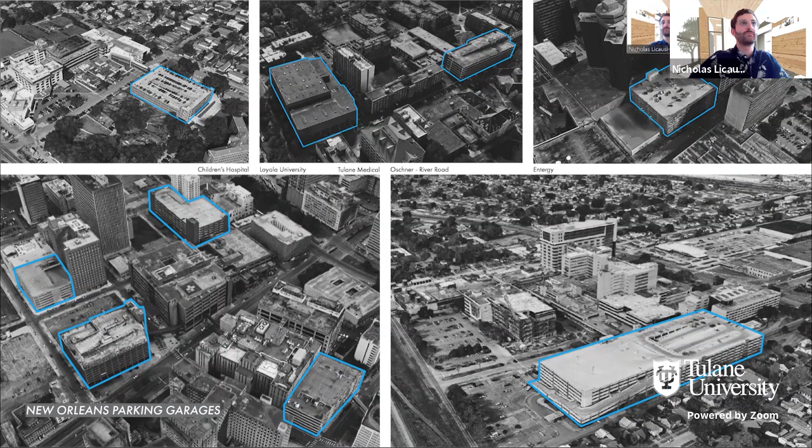For the purposes of this project, we focused on the central two-way ramp typology, as it has a high flat-to-ramped ratio, and we began to imagine a communal space on the central ramp. To bolster efforts to combat global warming and offset the embodied carbon in concrete parking structures, and to go towards achieving net zero energy, we suggest these housing structures be built from Southern Pine CLT.

There are two new plants in the Gulf South planning to use Southern Pine. These plants are within 300 miles of some of the cities worst hit by natural disasters in recent years. This CLT disaster relief housing is modular and will be inserted into the parking garage along this timeline, which we'll go through in more detail.

First, kitchen and restroom units will be fabricated and shipped to parking garages. Next, these wet modules will be craned into the garages. Following a disaster, people will bring their cars, tents, and personal belongings to the parking garage and use communal wet units for the restroom and for cooking.

This temporary infrastructure is supported by the concrete structure so that displaced community members will have the opportunity to stay in the parking deck in a more permanent residence. After the number of necessary housing units is determined, living units will be prefabricated.

The units start their journey in a CLT factory where all walls and floor slabs are made out of 3-ply CLT. Those CLT panels are shipped to a modular construction factory where stud walls are constructed, apertures placed in, and furniture installed.

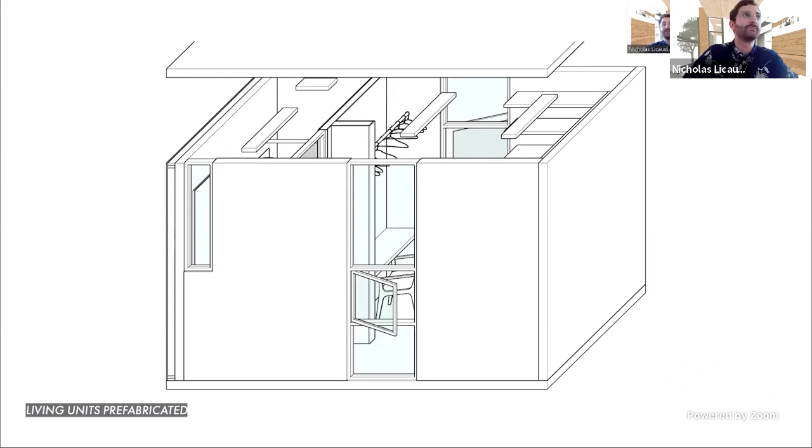Due to their small size, one of these units could be fabricated very quickly. The plan of the unit shows a small scale to space, which emphasizes the goal of building community with larger communal spaces. There is not a kitchen in the units, to foster relationships between residents and reduce the size of the unit. The ceiling height maxes out the allowable height for transportation on a flatbed truck.

A transom window over the front door allows additional light into the space. One living unit consists of 2 C-shaped sections and uses 589 square feet of CLT.

Adding a window to the bathroom does not equal waste. Panels are cut, split, and rotated to create voids for a window on 2 separate units. 2x4 stud walls are added to the CLT for interior walls and for a plumbing wall, in order to lighten the load of living units and reduce overall costs.

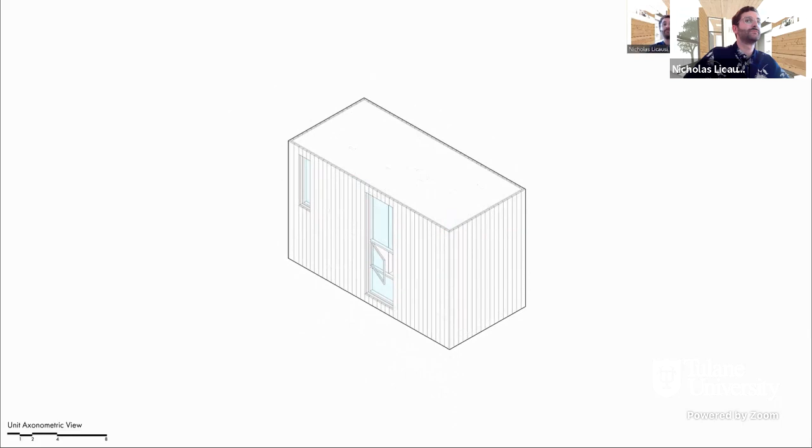Most of the furniture, including the bed frame and shelving, is built in. The cladding on the unit is vertical aluminum panels. The windows are frosted and the middle partition is operable.

On the interior, the CLT is left exposed to create a soft, natural atmosphere within the unit. The living unit is designed for 1 or 2 people. The exposed CLT makes the unit smell like a pine forest.

In order to accommodate families, we have thought about expanding the unit. However, in our drawings and aggregations, we have focused solely on the 1 to 2 person unit.

The total cost for one living unit is approximately $20,000, or $150 per square foot. Each unit is 136 square feet and weighs 9,352 pounds. The units are built such that 2 can be loaded and shipped on a single flatbed truck.

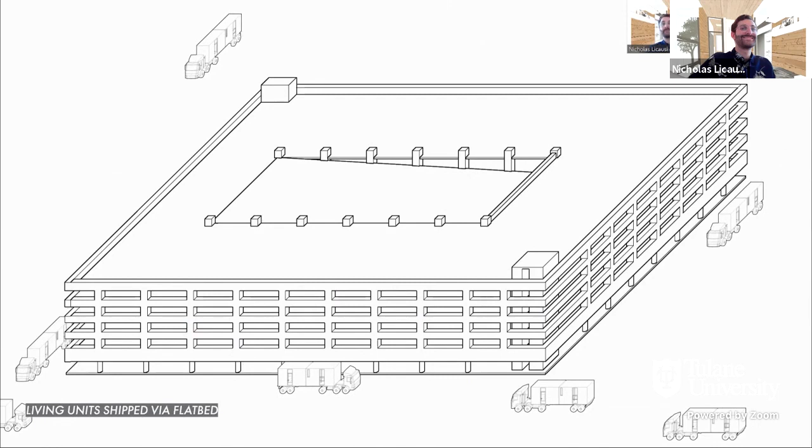After fabrication, the living units are shipped to their destination. Once they arrive, they're craned to the top of the parking garage, where they are aggregated and communal spaces are built. Towers are constructed to increase the number of stair and elevator cores, as well as increasing density.

These towers could be placed in a variety of locations not connected to a parking deck, as a form of disaster relief housing. Once the people displaced from the disaster either move home or up to their more permanent unit, the parking garage may be returned to its original use, with the living units on the roof.

In the first floor plan on the roof, the units are aggregated in a snaking, single-loaded corridor with wide hallways that allow for front porch-like community interaction. Communal kitchen and living spaces are interspersed throughout the complex and adjoin communal outdoor courtyards.

At the center of the aggregation, the central ramp is filled with soil and becomes a large outdoor communal space with plantings. A ramp is cut through the soil, providing access to the rest of the parking garage.

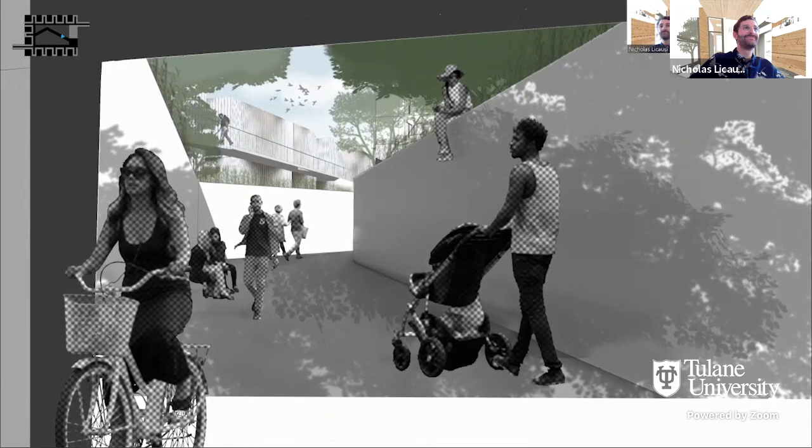With this route, cyclists could bike through the entire structure from their homes to the ground level. Stairs, elevators, and a long ramp allow for access to the second story of the aggregation. Voids are cut into hallway floor slabs to allow for light to enter the floor below.

Units on the first floor would have access to a shared outdoor courtyard with connections to the communal living and kitchen spaces. Hallways become gathering spaces, and residents are encouraged to add furniture to use the space socially.

The freestanding towers are connected to the parking deck via a bridge. They also include communal spaces on each floor. The parking garage may still be used for its original purpose on floors other than the top floor, and is accessible via vehicle and cyclist.

Residents of the rooftop are able to access their units via private elevators and stairs in the towers. Elevators and stair cores in the original parking garage are also extended, and residents can use this as a mode of entry as well. Once the units are craned into place, the insulation and cladding are placed continuously on site.

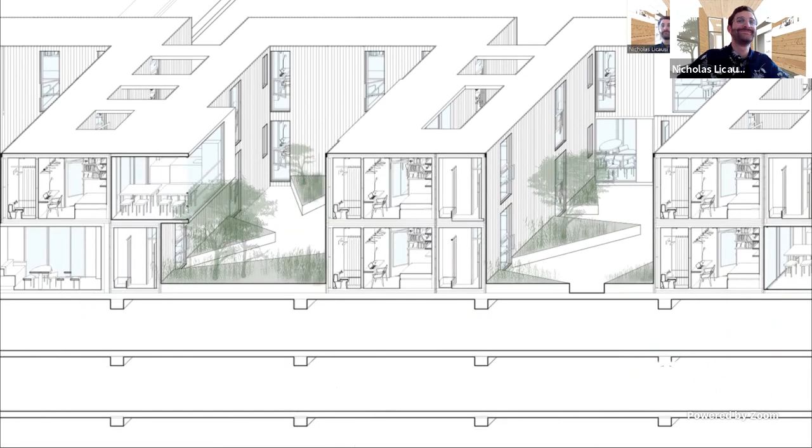Planters are added to delineate outdoor space between the units. After the need for disaster relief housing is through, the complex may be used for other purposes.

Because garages are often near hospitals, these spaces could be renovated for medical uses, such as outpatient care. They could be used for dormitories, since many universities have parking garages. They could also be used for a myriad of other housing needs.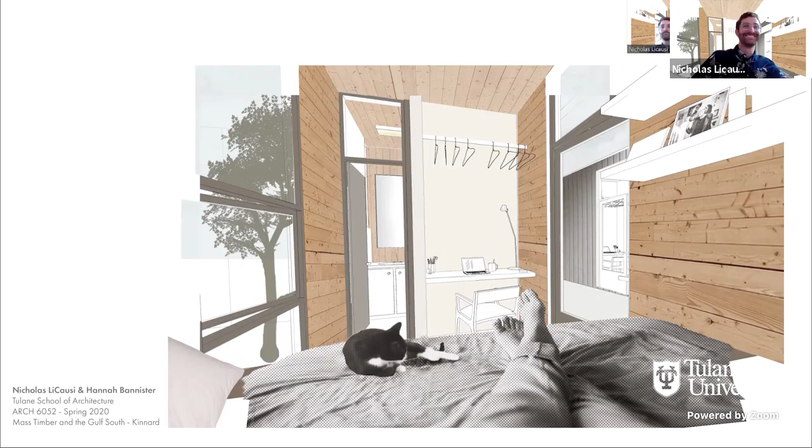Greenhouse gases are causing global warming, and our reliance on automobiles is decreasing. As a result, parking infrastructure will be less necessary in the future, while disaster housing needs will be increased. These ideas combined have led us to the conclusion that parking garages and parking infrastructure is the ideal typology for disaster relief housing, and that mass timber is the ideal building mechanism.

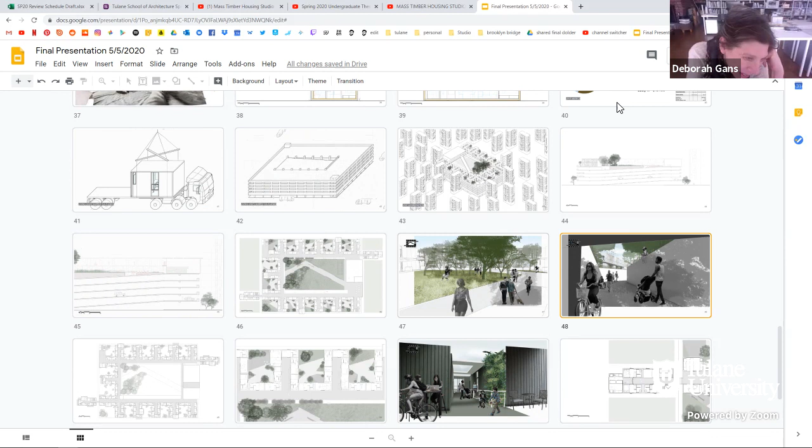Thank you. Thank you. Can you click on number 45? Can we look at that bigger, if you don't mind? Okay, 45. Or are you able to show just parts of it or not? Do you have to go back to the video? It might take a sec to open up, but okay. Maybe I just show it in this view. Is that okay? Sure. Or 44 may have been a still view. I just wanted to see the section again.

So the idea is that you build a planter on most of the last run of the ramp going up, except you leave a thinner piece for bikes to get up. Is that the idea? Right, I think if we show it in the plan, we cut like a little pathway through the planter that's in the central ramp, and that pathway is not necessarily straight, but we made it into an angle, as you can see. Yeah, and this definitely brings up concerns about load and considering all of that weight on that ramp.

I think this is a very idealized version of what would happen. Probably more likely it would be smaller amounts of soil and more open, lower spaces. Or built up with foam. We're working on two projects with MVVA, and a lot of that mass is built up with foam, and then the soil is very carefully located for trees or plants that need deeper root structures. So it's possible to do this with lighter weight technologies.

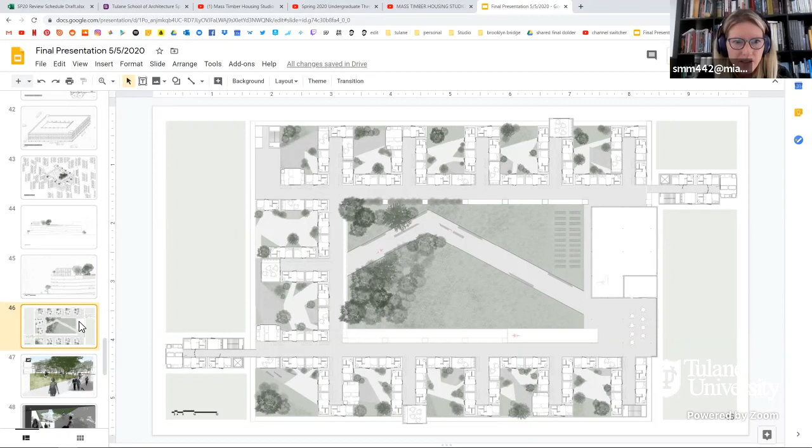And is it, sorry, fair to, as I understand, the top right and the bottom left, are those the community kitchens, or could you do, where's the public spaces then? Are they it, or? So those would be these additional modules here that are the same size as the units, but those would be the dedicated kitchen and living room spaces. So in the plan, you can kind of see some of them sticking out, and then they all have access to these interstitial courtyards. So one sort of shares a space that's a living room and a space that's a kitchen. Correct, yes.

Everybody, it's such a nice project. I thought Iñaki might enjoy this. I once gave a studio similar to this, where a group of students used a parking lot, but it was on the roof of an IKEA, so everybody ate in the dining room and could use the furniture. I thought he would appreciate that, because I know he has a fondness for IKEA. Anyway, it's really a beautiful project.

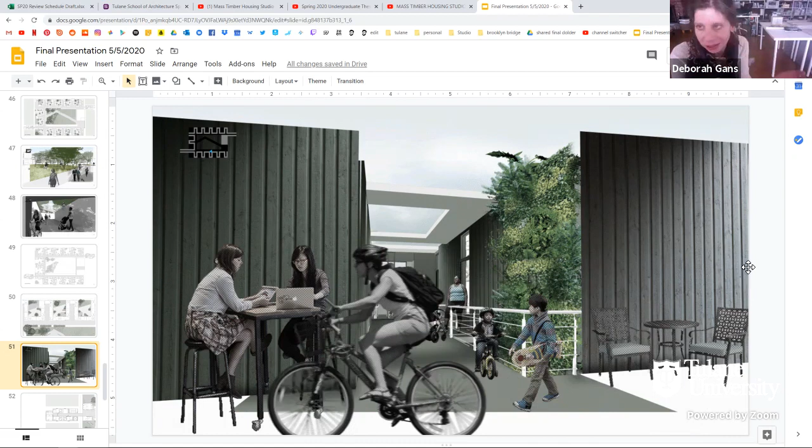You could accommodate, even with your plans, more than different kinds of alternative family groups with different amounts of co-housing, because of the way you've created the kitchen module and the social module, so that you could have a whole mini courtyard that became an extended family. I think social networks are so important to maintain in these disaster scenarios. People feel so atomized. If they can keep those connections, it's really, really useful. I think you have a system that could do that. You could cluster grandparents, children, grandchildren, extended families, or even neighbors, and tone the amount of sharing and the amount of privacy. So I think that's great. You can articulate that in your project.

Just one little technical thing that I've seen throughout the projects: everybody is cladding things on site. There's no need, you can clad it in the factory, especially even if it's multiple stories, and then you just have the seam in between. If you wanted to speed it all up and not worry about making this a construction site, there's no reason not to clad it.

Small detail - I was surprised, because I was imagining that when you were starting the explanation, the occupation of the parking was going to be in the interior levels. Yeah, we were too. So you were. It doesn't work. So very good. Of course, I was wondering how you were going to organize those, because those are very deep floor plates for light and so on. But I still think that probably in your discourse there are some long, big picture issues here.

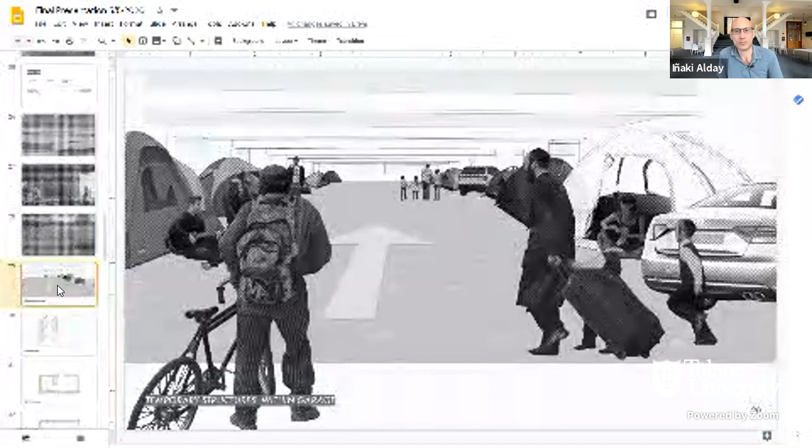If you are arguing that car use is obviously going down - well, let's see what happens after COVID, but hopefully it will continue going down - with car sharing and all that, these structures are less needed, so you can use not only the top but also other floors, which also takes you out from the problem of roof for your units because you are covered. This allows you to think that small units cluster to generate a bigger unit, because the spaces in between are already covered. So you can imagine other typologies coming out from here, which is also interesting. You will have maybe a kind of thickness of the facade of those lower plants transform into housing, while the inner part of the circulation can still hold cars. You have to deal with the horizontality, because we humans like to be horizontal since we only have two legs, but that's something you can technically solve.

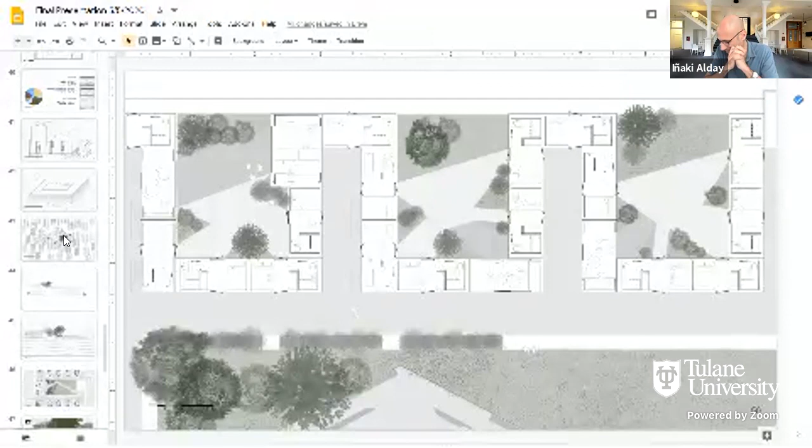The interesting thing also is that this project transforms the disaster into an opportunity for the city, to rethink the city. So you are hacking the downtown, and because there's a disaster, you take the opportunity of not doing business as usual anymore, but rethinking how housing goes. I think it's actually a really interesting big picture strategy. I don't think I can get into the details of construction, but I wonder about how the reformulation of the brief goes from disaster relief to the new occupation of the downtowns, redensification of the city, and eventually a rethinking of the footprint of the city.

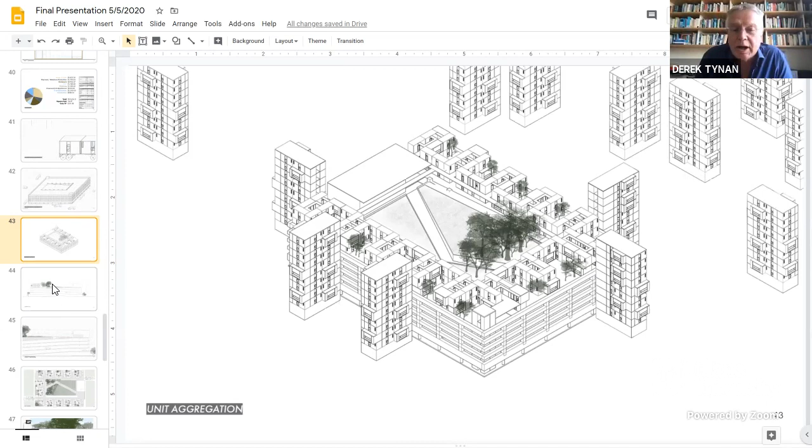Just to go back to Tim's question about the tents and the idea of arrival and temporary accommodation - super temporary accommodation in terms of tents, etc. I'm reminded of the manner in which refugee camps develop, where they start with plots which have to do with tents - I'm thinking particularly of those in the West Bank - and which then become cities or towns with an extraordinary density of occupation, which is problematic at a later stage. What seems interesting about this is allowing people to arrive in tents, etc., and then providing something which has an extraordinary capacity to develop into something else over time, and as has been said, to intensify the city and become another resource for it.

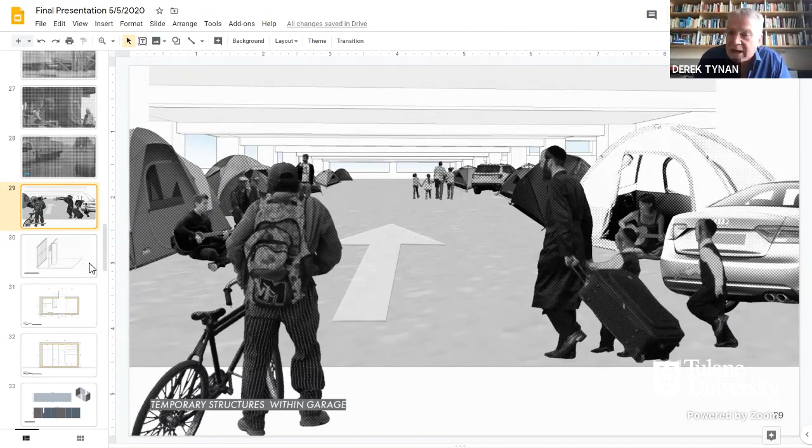And that seems to me to be a really fantastic kind of opportunity, taken to actually imagine what you have there as the tents, and then that tent city becomes something else on the roof, and in time that becomes a community all of itself. I think that possibility is really fantastic.

I wonder just one thing in terms of whether the units have to be small enough to be prefabricated in their entirety, and whether it's a question of forklift trucks—that they come off the back of a forklift truck and just get zoomed into place rather than dropped. They seem to be of that kind of shape that you could manage to put them on some form of mechanical lifter rather than having to crane them. They could just be run into place.

We've done it with bathrooms and things like that, which are prefabricated, which would be half that size in certain cases, concrete shell types. But it just seems possible to do it with a form of forklift truck or something.

Is it a forklift truck? Is that the right terminology? I think it's the right type of terminology.

We were exploring that—initially there was going to be units everywhere, inside, outside, on the roof. But the main issue was the low ceiling heights, so I don't think a forklift truck or a flatbed truck could get inside one of these with a 12-foot thing on top of it. Right, okay, thank you.

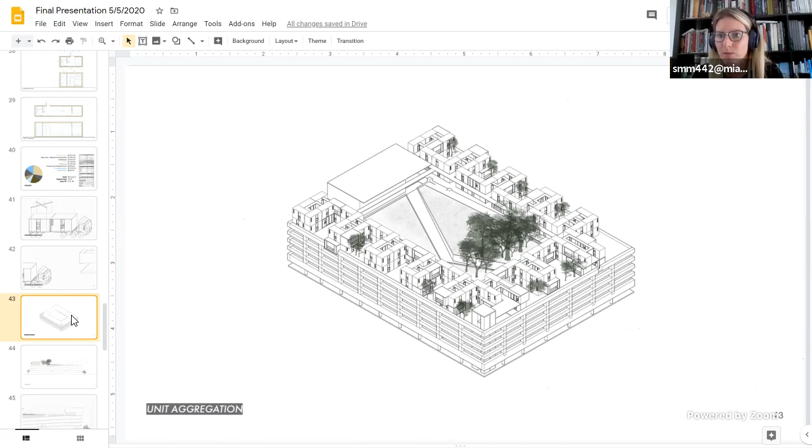But the reality, especially that Deborah brought up earlier, about if you're putting the cladding on site—it's either a construction site or it's not, right? And I think you guys should be very clear in drawing your lines and your approach so that it is sort of this campsite with all these spontaneous amenities.

Like when you think about Burning Man—it seems spontaneous, but it's quite organized in terms of their organization and the infrastructure that's needed. And then how do your living units, that become maybe more sophisticated, insert themselves into that sort of spontaneous infrastructural system?

But there's a practical dimension to this, because we've been doing some studies recently about how a lot of parking garages are now overbuilt because of car share and other commuting patterns. It's true in a lot of North American cities now that the top two floors of garages tend to be empty even at full capacity. So this in a way relates to even these photographs—you see these very little cars on the roofs of these aerial photographs.

It's also true that a lot of urban medical centers are having a housing crisis for their staffs, especially nurses and interns. So there's a version of this story that might just be focused on medical centers in times of disaster, doing this kind of triple bank shot—where they are the institution that organizes relief, the team on site when people show up with their cars and provide the tents, and then through some partnership with the federal government, build more semi-permanent structures on the roof, which they then get as dormitories for their own staff when they're not needed anymore.

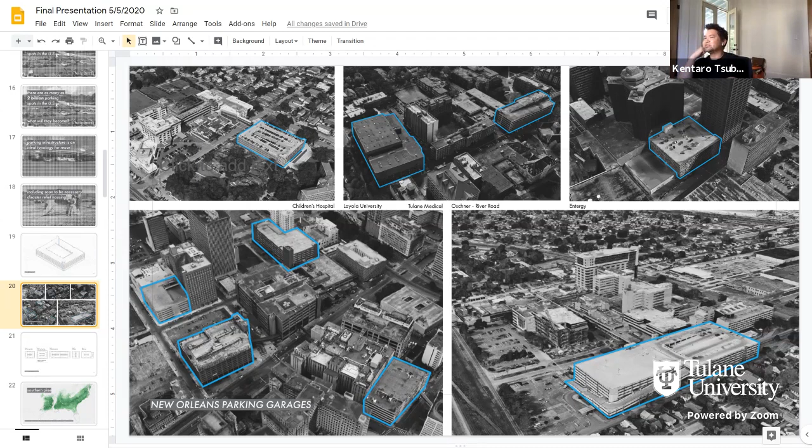I guess I could start answering your question, and maybe Hannah can jump in afterwards. I think initially I'm not exactly sure, but there are things embodied in CLT that just make it a better material use than precast concrete or steel. It's far more sustainable, it sequesters carbon. If there are opportunities to use it instead of these other building materials, we should, as architects, be using it.

Yes, I was going to say a lot of the same things. I don't want to dwell on this topic, but I think it could be an appropriate moment, as municipalities locally and internationally start to think about carbon pricing and the value add of healthy and sustainable building materials, for you to add a line item there for carbon pricing. That starts to offset some of the financial aspects. As architects we may tend to be dreamers and not always care about the financial side, but as a society we're starting to put an actual fiscal value on carbon and our global health. I think this could be an appropriate moment to introduce that idea.

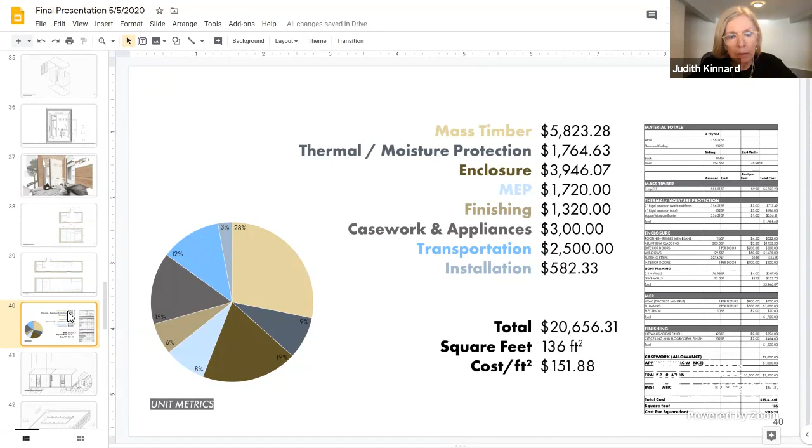I'm sitting here wondering, in the COVID moment, what's going to happen both with construction broadly, but will office buildings, hotels, places that typically have used wood construction, even dormitories, are those projects going to go forward? Do we need to find ways of promoting this material and its carbon benefits in smaller scale residential contexts to help solve a housing crisis independent of disasters?

I mean, it's being used in Boston now, partly because of its aesthetic benefits too. Just before COVID hit, there were even a couple of projects in the neighborhood where I live where at least certain components of the project were using CLT. So I think there's a double benefit that is motivating some developers to use it.

I concur with what Deborah says. You can, I think it was 13.6, was it you said, Deborah? It depends on the roads and where you're going, but yeah, around that. It translates almost directly into the metric figure I was talking about. Yeah, exactly.

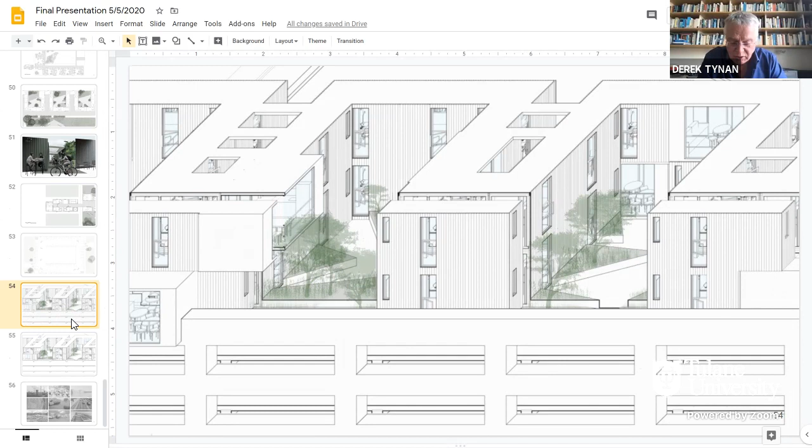But generally, because of trying to get to heights of 6 or 8 floors, it tends to be wood frame rather than timber, and fire issues are one of the significant ones in terms of multi-unit versions of it. But certainly up to 3 floors, we're looking at versions which are duplex and 2- and 3-story housing. It seems entirely possible to use it once you get over the issue of what the party walls are, because the party walls inevitably end up as masonry in this part of the world, and nobody will rely upon otherwise - it goes back to the Great Fire of London, I think. But there are so many ways of doing that. That's not a problem.

So I think there's a tremendous possibility in terms of sustainability and the issue of carbon tax, which in Europe is a situation where the EU has decided that if you go over a certain amount, then you have to pay. Ireland has a lot of cows, which is a difficulty - we have a huge herd, and they burp a lot, so we have a lot of gas, and that's an issue. I think carbon taxing is ultimately what will happen, and it is live at the moment in terms of an economy like ours, in terms of what it has to pay in fines for not staying within its carbon footprint, or its carbon allowance, shall we say.

Interestingly enough, a lot of these southern pine sawmills send these wood pellets back to Europe for biomass burning. That helps to offset these equations you're describing. Which is crazy, to be moving biomass across the Atlantic in order to burn it - that does not make sense.